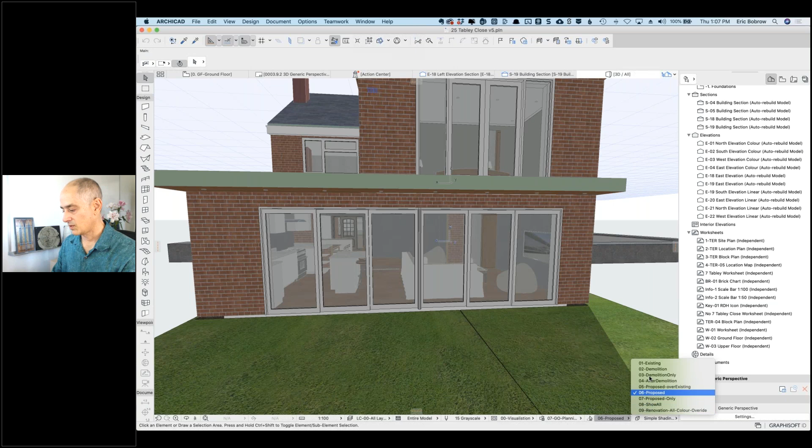Okay, so this is a proposed view. It uses the Renovation Tool quite a lot. So if you were to click on the Renovation Tool, you will see the existing plan. Wow, okay, let's get an aerial view. So this is existing, and this is proposed - yes, you're actually removing a bunch of stuff here. Oh yeah, okay, all right.

So, Ian from Scotland, anybody in the UK will be very familiar with this kind of bit of reconstruction, if you like. Originally the house didn't have all that junk on the back of it. Because the existing building, when it was originally built, maybe in the early 70s, that rather ugly garage would not have been there, and that extension on the back is actually 200 mil lower than the floor of the original house.

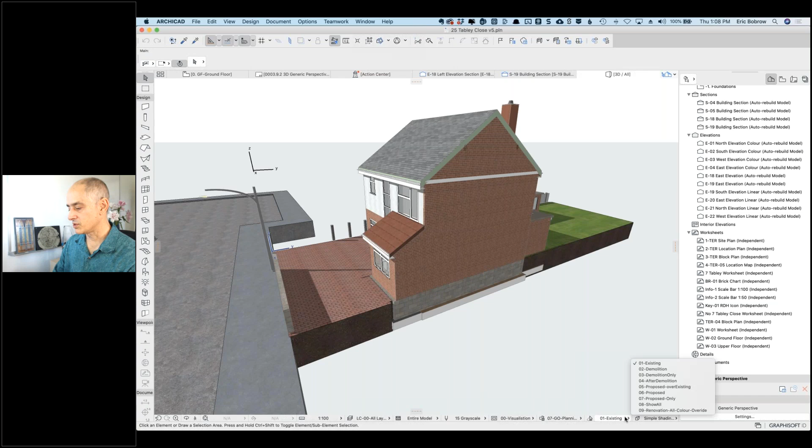So you drop down into there, it's damp, it's horrible - that's all coming down, and my stepdaughter wants to do what we call a wraparound extension. So if you were to whiz round, it effectively goes out to the side of it and then out to the back. So let's put it to the proposed here - okay, yeah, so actually, yeah, it's that side, yeah, it's the west side. That's it, all right, so this is proposed, and let's go to existing.

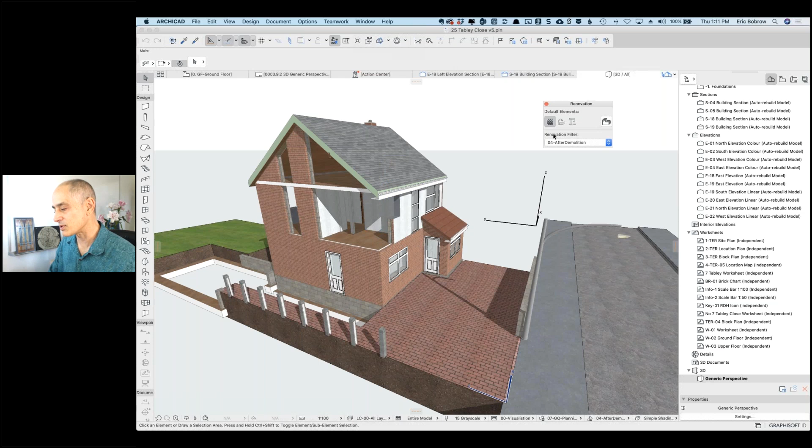And then after demolition, at least in theory, in abstract terms, this is what you'd have after it's removed. You'd probably never see the building look like this, but because of the phasing - proposed over existing highlights the new stuff and highlights what's being removed. And now proposed is here.

Now let's take a look at one thing here - what's going on with this roof? So this roof, the existing here, is extending past the new. It's natural that if we go to the existing conditions, this actually overhangs that area.

What we'd want to do ideally, for the cleanest result, is to designate that little strip - it depends on how we do it. If I go to proposed here and take this edge, we might pull this back to there. Now we're not seeing that line because we're basically only showing the new stuff.

So that's probably the simplest thing to do, even though there's going to be much more structural work done in there, and it looks like we're not seeing that as much there, but visually we can still tell this. So this is optional, but it would give a cleaner result.

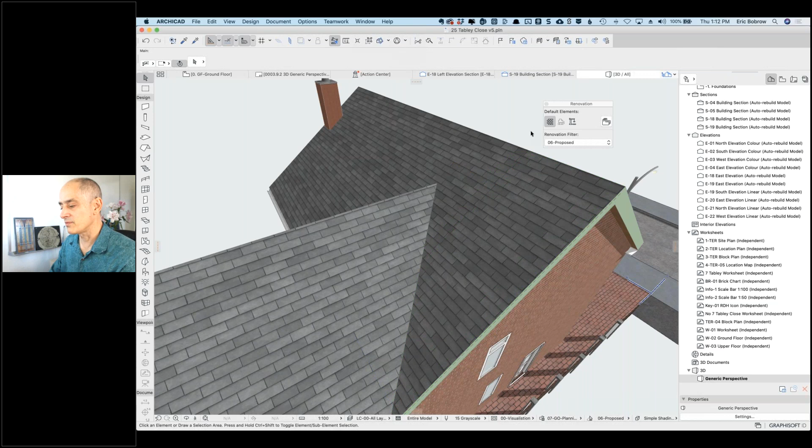Now I also see just a little modeling error here, or something that hasn't been dealt with. So this is a wall that is new, and this roof is new. Sometimes we have issues where things exist and they're being trimmed in different ways at different times.

Here it's going to be pretty simple - just take this wall, or the roof and the wall, and probably the simplest thing I would do first would be to connect them, trim elements to roof shell, using the roof that's currently selected, and you can see that disappears. Obviously a very tiny little thing.

What's going on here? Is this an actual bump out? No. So this is interesting just in terms of modeling - why are we seeing this up in here, but not down there? We can see it. Or is it a gap? Actually, it's a gap in here.

I know what it is - it has to do with an interior wall cleaning up to the other elements. So we could go in there and fix that.

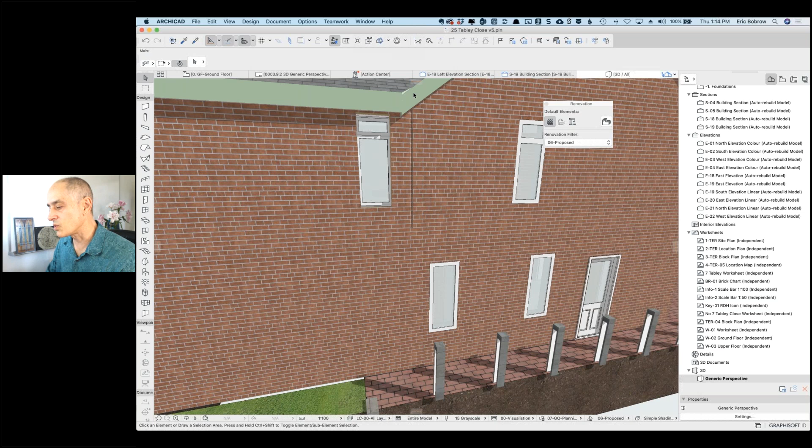We'd also want to potentially look at what's going on with the roof alignment there. So this is a new roof, meeting up with the existing roof and with this other piece of new roof - an extension. So probably what this is, we just need to extend this piece over a little bit and shorten that one so that they meet properly.

Now, you asked for general feedback - overall I'd say the model looks pretty clean. We haven't looked at any of the construction documents. What in particular would you like some feedback on?

I think first of all, there are a lot of errors, right? I'm using this tool to cut my teeth using Archicad. This is probably my fourth model I've done, and I'm trying to use it as best I can.

I think really the big mistakes I make are, particularly talking to my stepdaughter, who is my client, shall we say, she changed her mind many times over. So if I was a fully fledged architect, I'd be charging a fortune. But I think what I keep doing is I'll create a new version, copy and paste.

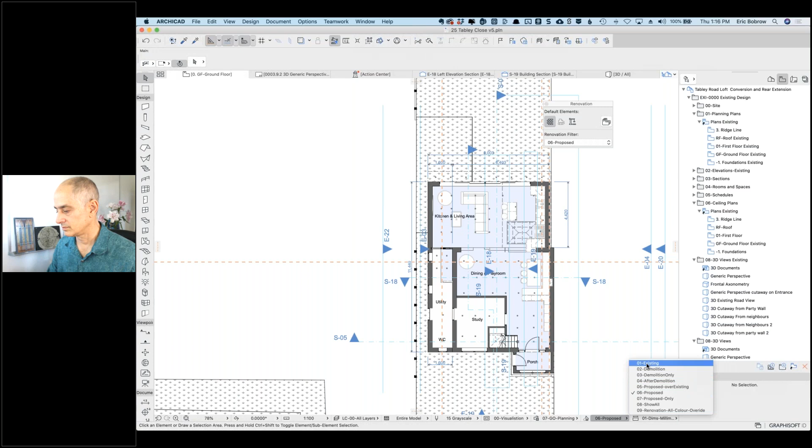And I think I just keep introducing errors, certainly into the walls, particularly when aligning walls up, junctions at walls. That in particular troubles me. So on the view you're looking at now, as a good example, that's the proposed view. If you look at the existing view and flick back, get an idea - the wall that's building, just to the right of your cursor, that junction there. I'm going to demolish that conservatory and butt a new wall up against that.

Now you're seeing it in what we would call the planning view, but in the actual detail, let's look at your construction document. So we have plans for first floor, we are on the ground floor - ground floor proposed. Where do you have a different style of view that's...

So if you change the pen, I use a graphic override. Do you have a view saved for the plan that you're just describing right now? I haven't created a layout view for it, no. Okay, so that would be a suggestion. But this is our graphic override - you want to turn off graphic override? If you go to design... 02 GO Design, okay, yeah, and that should, there you go.

All right, so now we're seeing, of course, a different depiction of the wall. So this is insulated here, and this is just hollow. Yes, cavity gap wall.

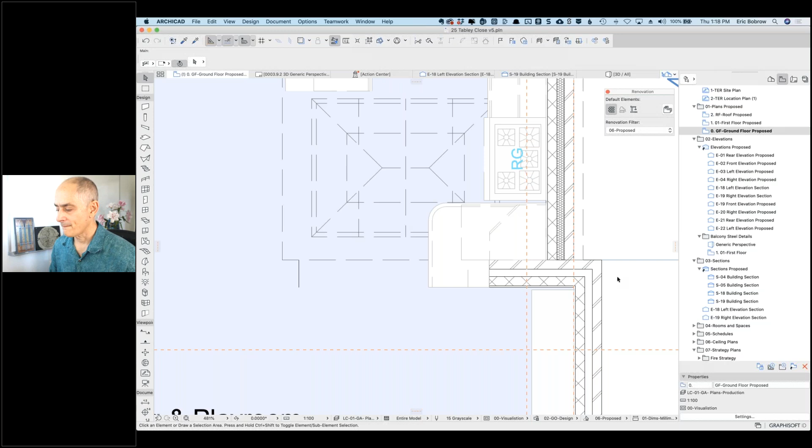Okay, now that we're looking at it in more detail, what specific questions or problems do you have with the way this is depicted or modeled? I think really it's the way it's depicted, not necessarily the way it's modeled, because a builder will take this drawing and say, oh okay, we're putting a cavity wall insulation on the back there, and they would quite cleanly not have this cold bridging arrangement just to the left of your cursor.

I mean, that's not normal. You would have a gap between the insulation there. That junction is not correct - you would take that through and create a cavity gap. Because I'm not familiar with the terms you're using, cavity gap etcetera - this is a cavity? That's a cavity. You're talking about the insulation coming down?

Yes, so they would remove that. And this looks like an exterior wall condition - what's going to go on inside here? Because this is now interior space, right? Correct, yeah. So in the proposed design, that would be plastered on the interior. So on the interior side, that wall will be split - that's easy in the zone, using the zone tool to do that.

But in terms of the detail on this drawing, if I was to present this to a builder, he'd laugh at it, because he would need to see where that insulation is coming up against the outer wall, as you see here. In reality, you would cut through, potentially cut through, or create some kind of bridge.

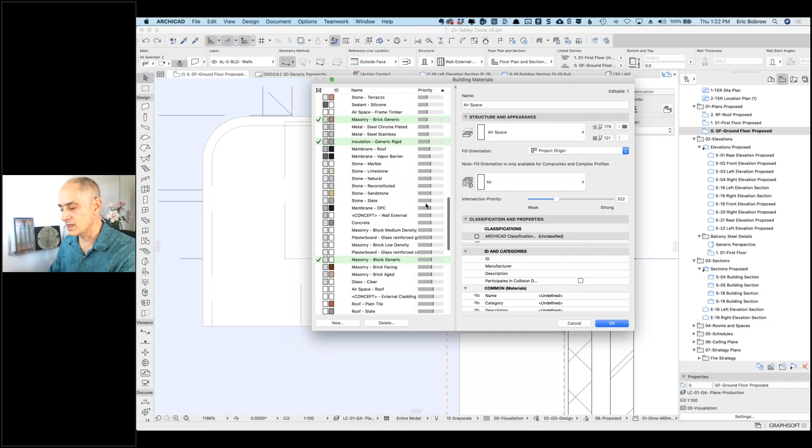You're just going to plaster over it. I just want to make it a different building material that will be permeable or have lower priority than the insulation. So I've just created a new one there, but I now need to go to the building materials, and let me just select these walls here and go to options, element, attributes, building materials, and say, all right, let's look at them sorted by priority.

And we can see that the masonry here, I think is this the block generic? Yeah, so that's the block generic, it's stronger than insulation, which makes perfect sense. But what I'm going to do is create a duplicate of this, and we'll just give it a designation, just so that it stands out differently. And then I'll take this duplicate and move it down below the insulation, so it'll have a lower priority.

Now, just by creating it, it doesn't do anything at all to the drawing, but now I can select this wall and say edit this. First of all, I'm going to change the wall to the new copy that I had done. It doesn't look any different, but in the new copy, I'm going to say masonry brick generic. Oh no, it was block generic interior. So it was brick generic.

Let's see, we have the plaster on the inside, right? Okay, so let me actually check. I guess I duplicated the wrong building material, not really recognizing this here. So we'll put a building material - the block generic, we want the brick generic.

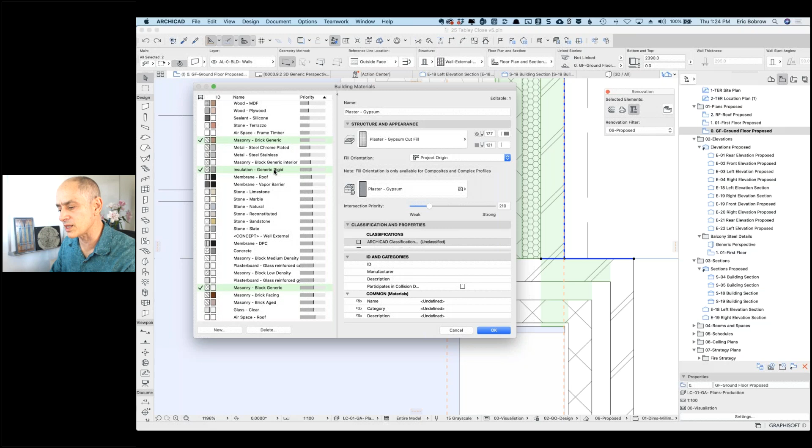So where is brick generic? Looks like it's actually lower priority than the insulation. That's interesting. So what I wanted to do was create a building material that was lower priority than the insulation, and yet we already have one. So why is this not changing the way it's cleaning up?

I'm going to just take these, probably because these two are not cleaning up to each other. So let's actually, let me just take this here and take this back here. No, okay, so these two, let me just drag a copy of them off to the side to see. So I'm going to drag a copy off to the side like this.

So the question is, why is this, if this is a higher priority than this one, why isn't it cleaning up? Let me think about this. This should - so these are turning the corner, but this is higher priority.

So let me see if we were to change the reference line here. So we go to edit, reference line and plane, modify wall reference line, and say I'd like to put it on, let's say, the core outside. Okay, so now it's placing it there. Now, if I take this down to there, okay, so now we're seeing at least a possibility here.

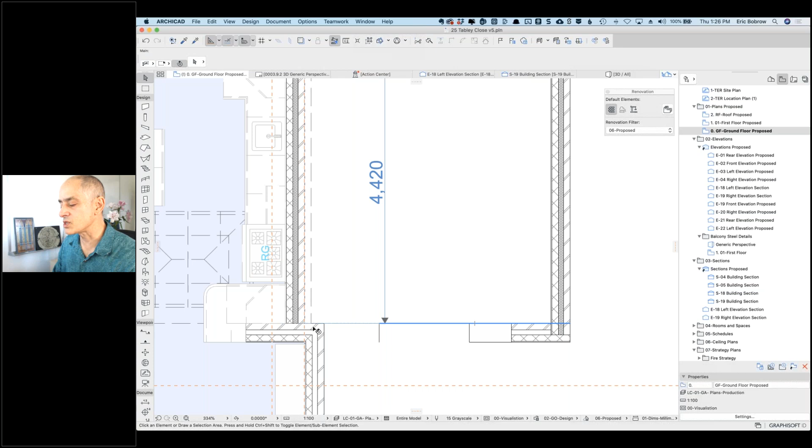Now, this is apparently stronger than this, or these. Oh, it's interesting, this is reversed. I guess - yeah, because that's an extension wall. So that was an outside wall. Right, and this is an inside wall, of course. And this is the interior, yeah.

So we may have to do a combination of things, but what we ultimately want to do is play with it. And again, this may take longer than we have time to do. We would want to break up these walls into potentially 2 or 3 pieces - we've got 2 pieces, but we might need a 3rd piece in order to get the effect that we need, and end up with the insulation coming down and things cleaning up to each other the right way.

So you're going to be doing some reconstruction in this area to get the insulation down there and to cut off parts of the masonry. So that would be a starting point, would be to break it into multiple pieces and help Archicad make the cleanup of the corner.

You'll want to also consider, in some cases, just having the building materials with the right priorities so that they pass through. In this case, the interior one seems to have a higher priority than the exterior, so that might be something we need to consider. So if we go here to building materials, select these two. When you select them, you can see the ones that are in use, which makes it much easier to adjust.

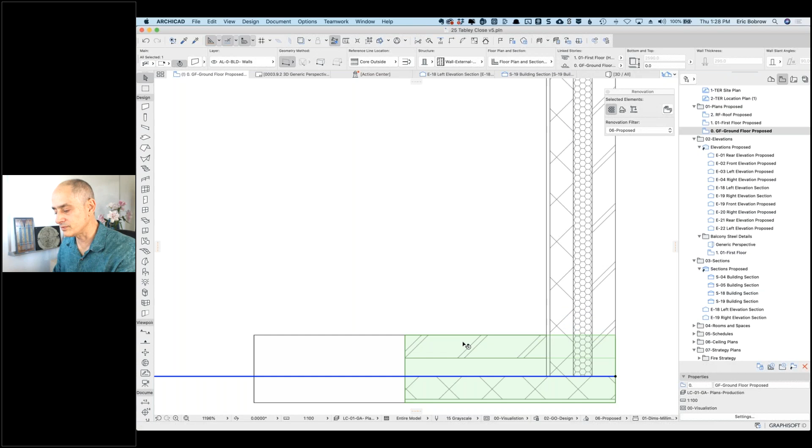Let's just do a quick test here of saying that the brick generic and block generic, what if we were to take the, so the brick is the outer one. Let me just take this down. Brick is the... just what happens if I do that.

Now we've got a different type of cleanup going on with the plaster in here. We would be putting the plaster on this. So this one we're going to be plastering over, right? Yeah.

So we've designated this as a—what do you call it—so the masonry here, which was the outside face, I'm going to insert a skin of the plaster gypsum. We'll say insert a skin. We'll say that this is going to be the plaster gypsum, and of course the thickness is going to be 15 mil. So 15 there. And this should be a finish there.

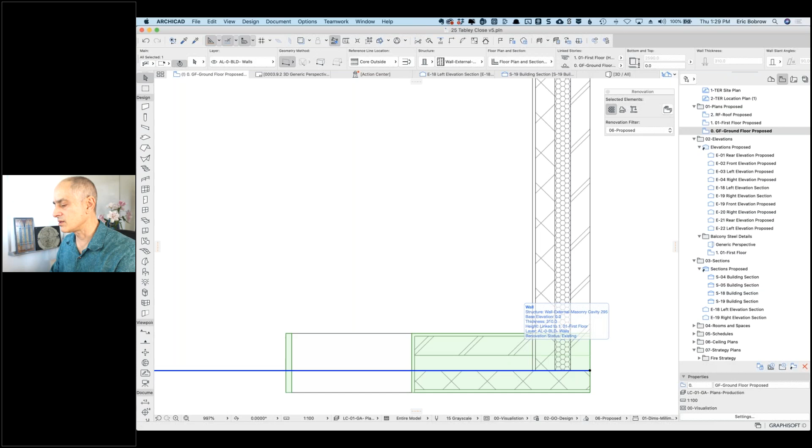All right, so now you can see I'm starting to at least get the plaster on this area. Question is, why is this? Is this the actual same composite? I just wonder, it's nothing to do with the renovation tool, is it?

Because this is proposed or new, and this is existing. So let us see if we were to, in this copy here, just make them both existing, just see what that does. Yeah, oh, look at that.

Okay, so there is a setting here that in the renovation filter options has to do with whether existing elements are going to intersect with new elements in this particular filter. So if we say we do want to allow them to intersect, because they're going to be sort of reconstructed to intersect, then I can undo back, and this is now new, but it's still doing a cleanup. And in fact, now we've got this turning the corner here.

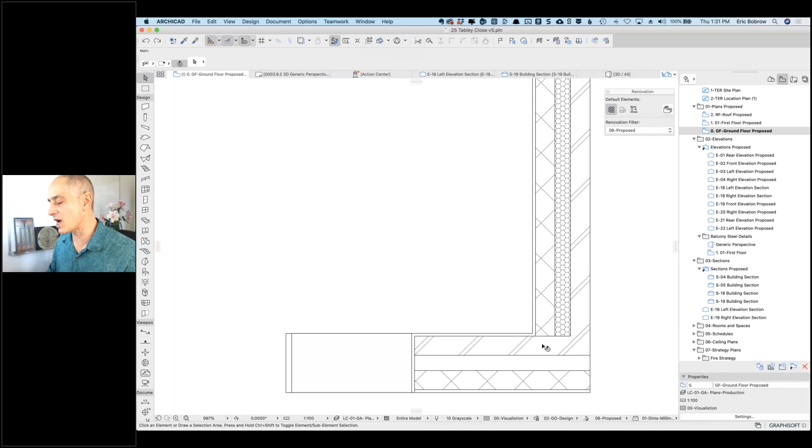Of course, this wouldn't go through like this, but we'd have to keep playing with the priorities to get—we don't want the insulation to be the highest priority, that doesn't make any sense. No, that was a good find. It's the renovation tool, yeah.

So I just moved these both down there. So I think, what was it, was it the brick one that was—well, let me just move them above the insulation here and see what that does. Okay, so now you can see that as we play around with it, we end up with some different results.

So just by doing some experimentation, making sure that this is higher than this one, and this one might be—we might use the copy one to make it a lower priority. So let's see this one. I realize I want to go on to other ones, but here's brick generic.

I think, Eric, what you've just demonstrated there is I will now work with that and then just establish what's going on there. But I figured it was a renovation tool thing, and make sure I've got my priorities correct. But the renovation tool with the 'do not intersect' unchecked—which is actually, yeah, that's a negative way of thinking to me.

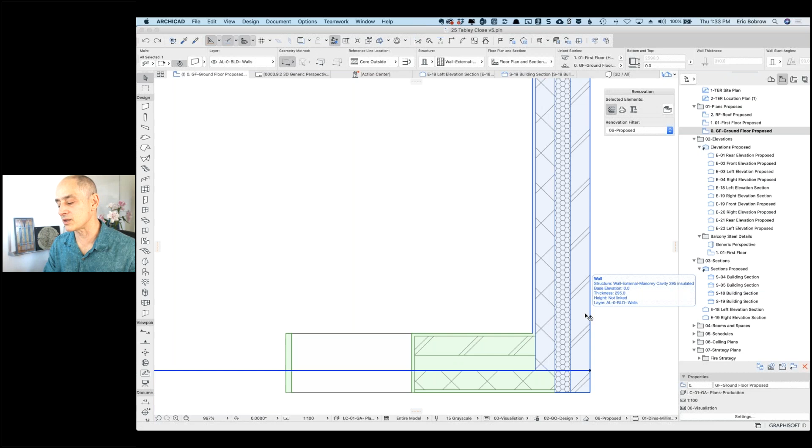So okay, we know some of the tools that you'd need, related to possibly creating additional building materials, changing reference lines. So that things do clean up, and it may be that we want to move the reference line up here, actually, rather than down there.

But changing the renovation filter options potentially to have things clean up to each other, because we don't want to say that this is existing when it actually is new. We want to go and get the overall stuff that we were demonstrating earlier to work.

So this is a complicated thing, and one of the limitations of Archicad's renovation system is that when changes are made to a part of an element, like if you removed cladding and replaced it with a different type, unfortunately you have to basically tell Archicad to demo the whole wall and put in a new version of the wall, even though you might not be doing that. Same thing with the roof.

If you've got an existing and a new, we were able to pull back the new part to just be where it's extended. But in some cases, you're going to have parts of the existing to be removed, and you actually have to split the roof into two pieces, the part that remains and the part that is going to be removed. You can't just say existing is the whole thing and then this part comes out. You actually have to make it puzzle pieces that fit into each other.

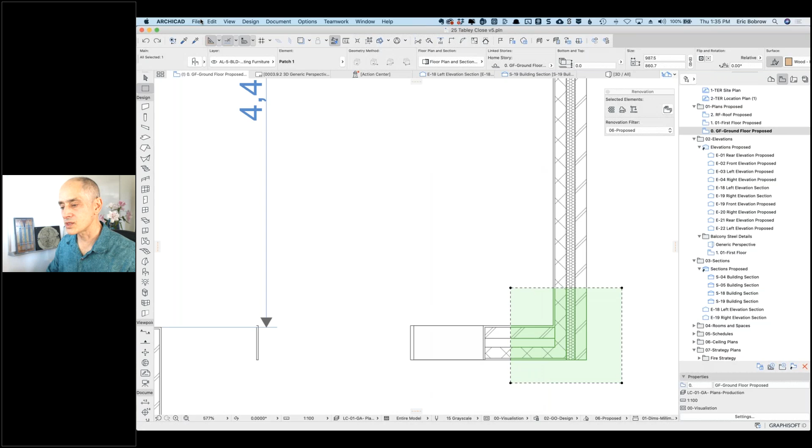And the other possibility I'll mention is, while I do think this is achievable if I took another 10 minutes, there is a tool called the patch tool, which I don't recommend using frequently. The basic idea is I draw a marquee around an area, go to the document, Annotation, create patch. What that does is put into your project library a graphic, and I'll just leave it as the word patch one.

And this graphic here, if I put it back in place, I'd like to open it. With it selected, I go to Libraries and Objects, open the object, which happens to be that patch object. And now I'm in a 2D environment where I can literally go and delete things.

We'll just do one quick thing here. Get rid of that line. These lines there, stretch that to there. So this is sort of, and maybe we get rid of the line. Okay, so now we have something that sort of looks like it's wrapping cleanly.

And then of course we have this fill go away. So we'd be doing some of this stuff. I'll just leave this slightly unfinished. I'll save it. And now when I go back to the ground floor plan...

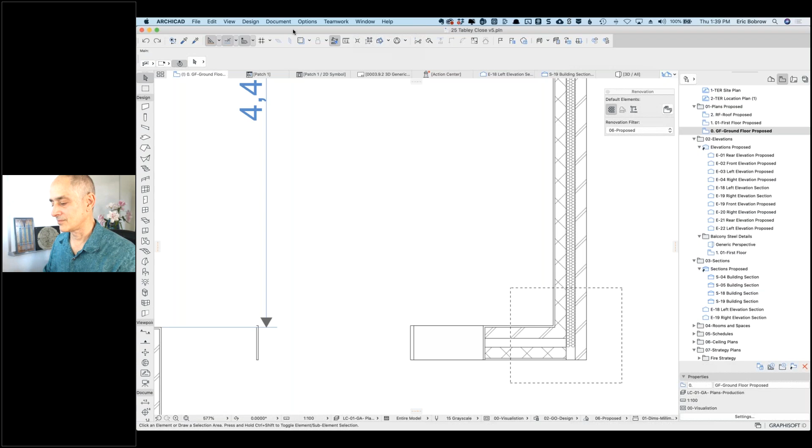My inclination always is to say, all right, well, if we just had a slight variation of the building material for a piece of wall, can we get it to automatically do the right cleanup? Yes, but it would probably take a little bit more time. So thanks for giving me a good thing to go over.

Is there anything else before we move on? No, it's been very useful, I think, Eric. It is a powerful tool, and there's lots that I'm learning all the time. The stair tool is a nice tricky little one, I must say. Yeah, it's continuous work in progress for me. For sure. Now I'm going to just save this as a variation and I'll send that back to you.

Obviously, this area here you can just study. What I did change: added 2 new building materials that were copies of existing ones. I created a new composite that was only partially successful. And I did move around some of the building material priorities, which would need to be studied more carefully, because as I move things around, certain other things may not clean up properly. But you'll have this file to at least look at and see what's going on.

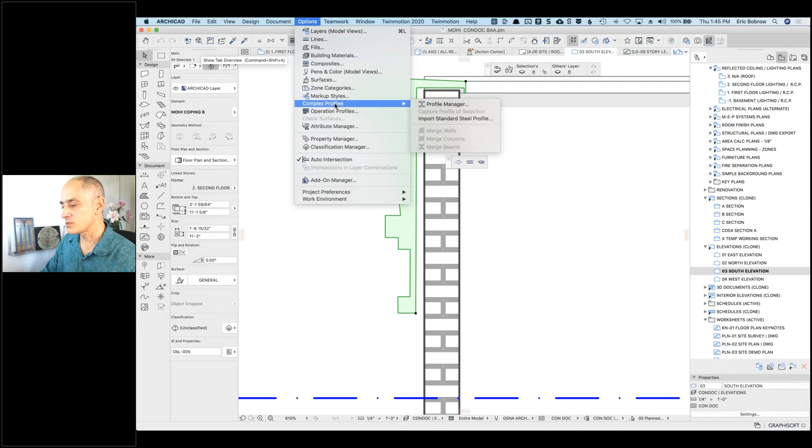So fortunately, I can quickly create one of these, and I'll show you how that's done. I'm going to look to see if you have an elevation that would have this information, like this particular edge exposed. Guessing that it's south elevation, but I don't know which orientation it is. Okay, so we do see a piece in here. So this is your coping object?

Correct. Okay, now we're seeing it in elevation. I don't know if this is straight on, I'm assuming it is. What I want to do is copy this as a graphic and paste it into a complex profile window. Now, given that it's an object, I'm not quite sure whether I'll be able to do that directly. So let me just say copy, and we'll go to options, complex profiles, profile manager.

And I'll say that I'd like to create a new profile, and we'll list it coping 1. This allows me to draw a shape that's going to be used as an extruded form in your model. Now let's see if I can paste this in. Okay, yeah, it looks like it came through cleanly here.

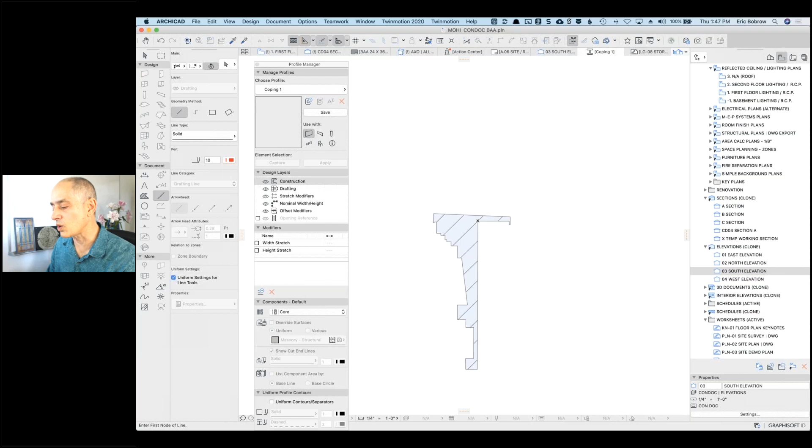Now, what you'll notice is that there's this little X. The X is the origin point of this particular profile. Now, what we want to do is position this shape, which is no longer an object, it's literally just a fill. We want to position it where it'll be easiest to draw. I'm going to guess that if I drag it down so that this point here is what we want.

These are now lines, so I'll just select all the lines by activating the line tool and doing Command A or Control A, and then I can drag this down. Now, the complex profile will actually ignore the line work, it'll only be paying attention to the fill. But actually, let's just undo this. I'm going to get rid of all those lines, and then I'll just select the fill.

And say I'd like to have a contour around it, and maybe just make it a thinner contour. All right, so now this is a shape that I can say I'd like to be able to use with beams. Now it's possible we might use the wall tool sometimes, but primarily I'll use it as a beam option. Now what is this actually, what is it made of?

Well, it says here that it's a fill that's going to be represented or made in the model as masonry structural. Now, maybe that's appropriate, but I'm going to guess that concrete precast might be a better option. It'll be rigid foam. Okay, so then, do we have a rigid foam in this?

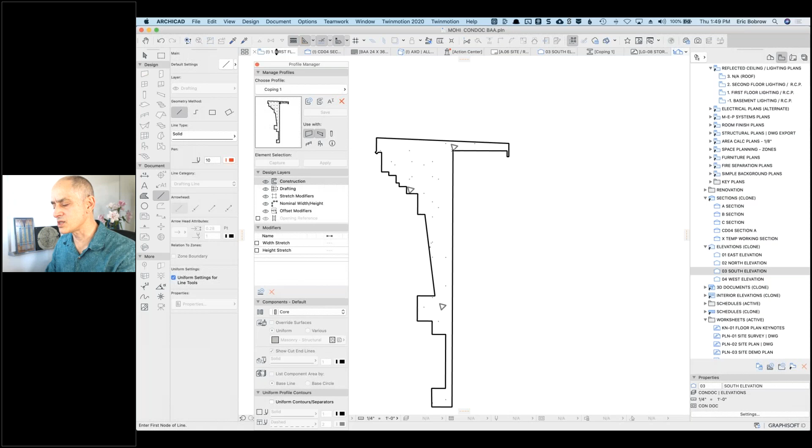Well, let's just do it here, so we're not getting sidetracked. It's basically going to be something that is applied and follows around to create the ornamental shape. Did I get this right? Yeah, the origin point is in the middle of that. So I've now saved this. You can see that it now shows the preview.

Now, how would we draw with it? Go back to the plan. And I'll just demonstrate that when we use the beam tool with this. Now I just clicked on the plan and it's giving me a spinning ball, so I don't know why it was taking a while. Let's turn off our trace and reference. I know this is just an excerpt that you copied over, but I'm not quite sure where I'm looking at.

Would it be in this area here, but up higher? Around on the other side, the top side. This side here? Yeah, over here. Yeah, along that front wall right there. Yeah. Okay. Mhm. All right.

So what I'm going to do is I'm going to go to the beam tool. Now, right now, I'm not going to worry about what elevation, I'll move it into the right elevation later. I'm just going to say I'd like to draw a sequence, and let's choose the beam architectural. We'll say unlock this layer here.

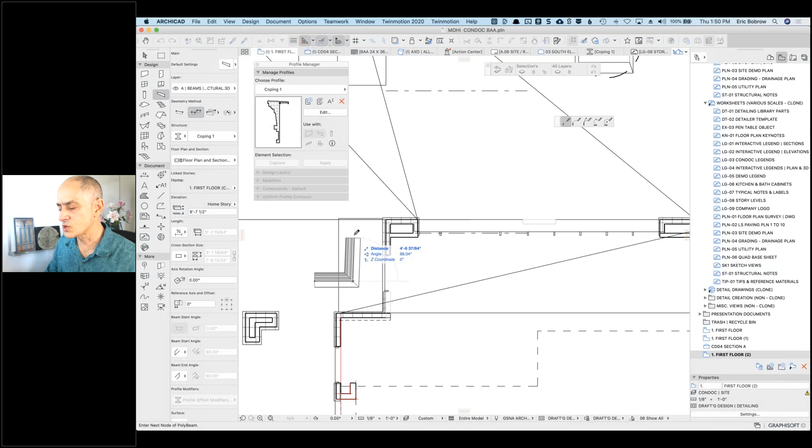Oh, actually, I have to choose. We're doing a complex profile, and the complex profile I'm going to do is the coping one.

Now as I draw this, we are seeing this rather complicated shape. I'm guessing the part below is the little top part that's just got a simple cap, and the part above on my screen is the ornamental shape. I'll just draw that up. I'm deliberately not trying to fit your building - I just want to show how it'll clean up to each other.

You can see the representation on plan. When you're drawing beams, you can choose whether you show the reference line or just the contours - that's optional. But let's take a look in 3D at what I've just drawn. I didn't pay attention to the elevation, so it's probably lower down, but here it is, and you can see how cleanly it's doing the corners.

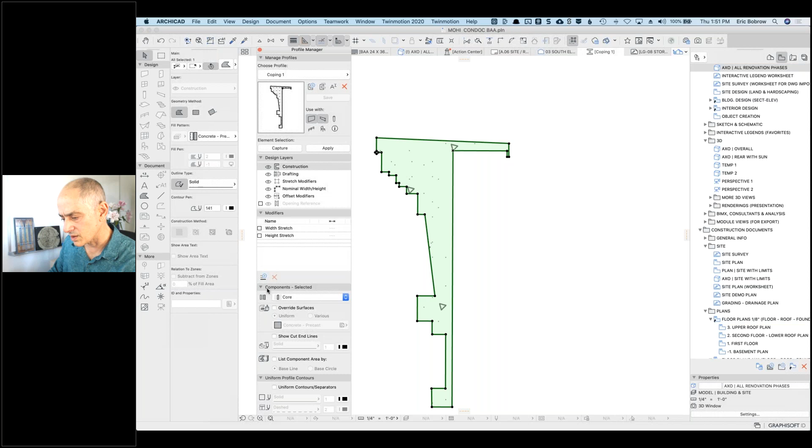Now, the surface appearance of this is based on what building material it was. I can override that, or I can edit this. Let me just edit it - as a starting point, we don't want it to look like dull concrete, we want it to be painted.

So let's go here to components - ceiling white. Let's see, override surfaces, and you have it as ceiling white. Yeah, so it'd be color, white ceiling. There we go. So that's uniform on this, and I'll save it.

So now if I go back to 3D here, now they're a bright white. Beautiful. Okay, so you just basically drag this up into position, or just draw it with the right point. So if I say this one as a starting point...

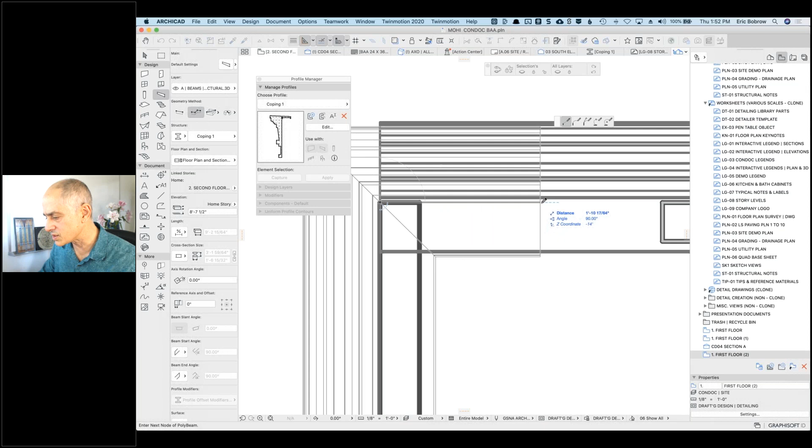If I get rid of it and we just draw on the plan - let's see, so we're on the first floor, let's go up to the next floor up perhaps. Yeah, here, I just deleted that. So we're going to go to the beam tool, and you see how it just snaps here, and I'll just turn the corner.

Let's see, what point should it be? Should it be this, or should it be... get me. Okay, so I'm not seeing anything that's snapping here. I'll just use the shift key to do that, and let's see what that looks like if I've gotten it right.

So it's on the wall. I just need to change the elevations, get the elevations there. So if I even wanted to just get the basic thing done quickly, I can drag this corner point up until it snaps to your wall, and now it is exactly, I think, in the right place.

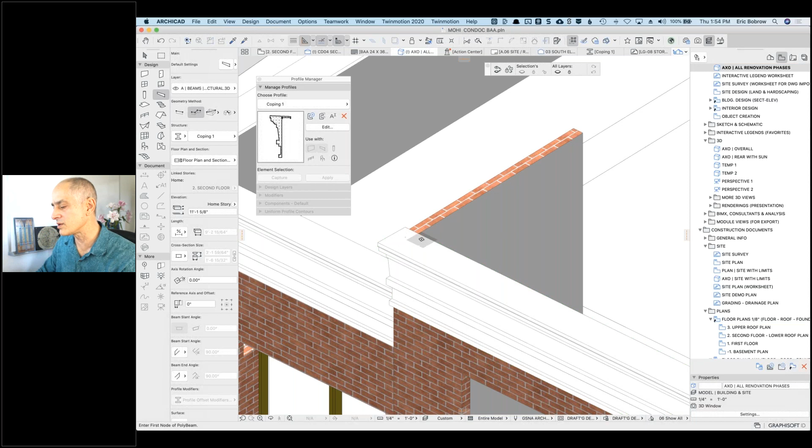And perfect, yeah, so once you've got this, you can literally go - we'll just delete these from it. Take this and stretch the end of the blue line right there, with the option to extend this, and snap that. Whoops, I don't think I quite got that there. There, that's the point there.

Although it actually looked like your walls were slightly offset, but anyway, you get the idea. It's going to clean up at the corners nicely with a complex profile used with the beam tool. So it should be pretty quick once you do that. Does that make sense? Perfect, Eric.

Thank you. You're welcome. So I'm going to go and we'll just save the project, and I'll send it back to you - save as. So I'll send it back to you after the call. Thanks so much. You're welcome.

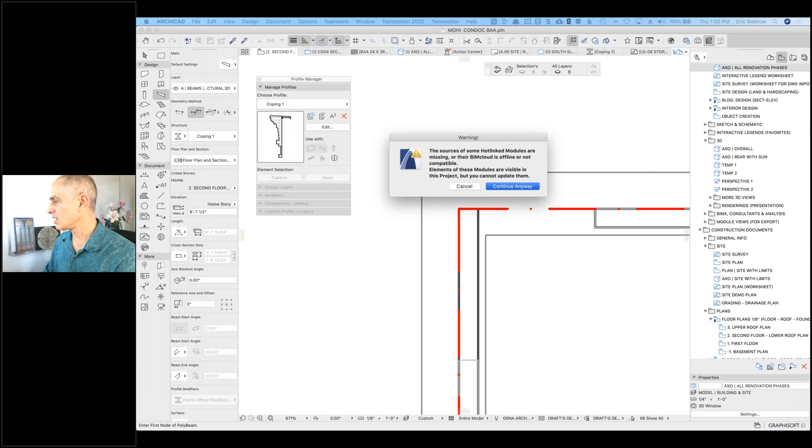So let us see. Okay, I see Josh Baran said he had to leave. I don't remember if Josh sent me in a file - I hope he wasn't one of the ones who was waiting to have a file looked at.

So Monica, I think we can do up next. Let me just check who I've got on tap here. And this is still saving. Oh, project review. Oh, meeting room is being taken over, and he was the one who had a template.

Okay, rejoin again from the shared group workspace if possible. That's too bad, because he had sent in a template. Didn't realize, and it's very early - he's down in New Zealand, so I thought he would be on till later. Okay, we'll see if he comes back - he said he might be able to come back.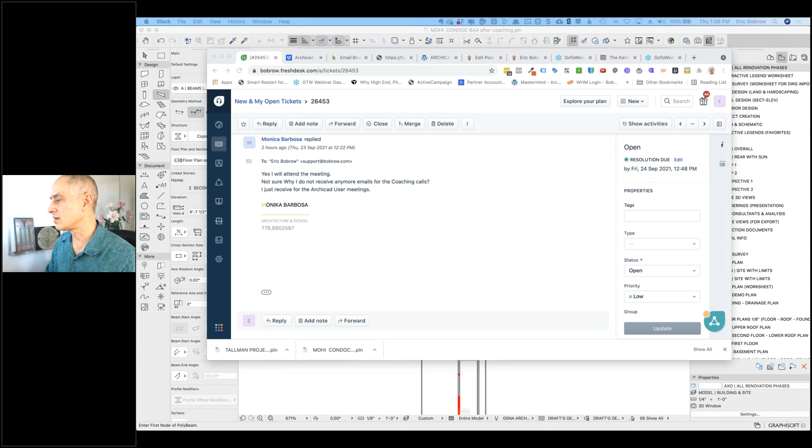All right, so Monica, let's get your file here. Okay, so I do see a question from Mike saying: when I do a 3D cutaway in a design view, is there a way to have the cut-through area show up in a tone or color? That is an easy question, Mike.

And so let's do another easy one - this is going to be literally 3 minutes, and then we'll do Monica. Let me open up Monica's line... and then we have Mike, your line there. Okay, so Mike, your line is open. So in terms of a cutaway in a design view, let me just switch to my sample project - the one I use often for demonstration - and I'll do a marquee cutaway.

This, and perhaps set it up to be multiple stories. Say show just what's in the marquee. Now, when we're looking at what's in the marquee here, we're seeing the edge with the components.

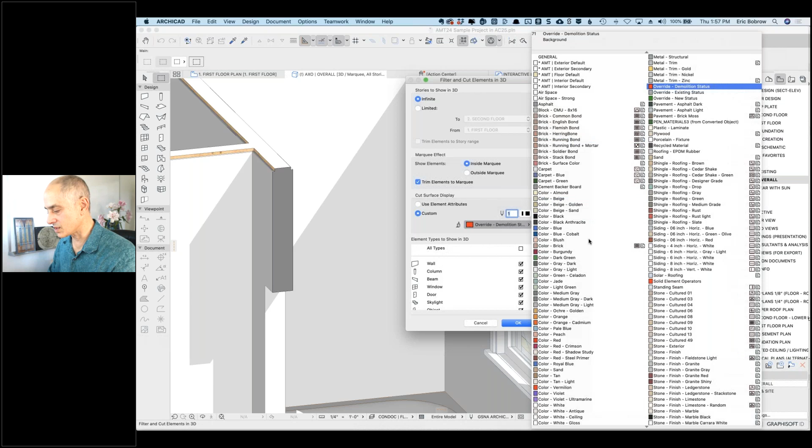There are two things that can affect this, or that you can control it. One is under the View menu, elements in 3D view, filter and cut elements in 3D. So we are cutting with the marquee tool these elements, and we can say instead of using the element attributes like we see here, I'd like to give it a custom edge.

Black would be one choice, like that, and it doesn't look really solid black, but it is black, just because I have a lot of light on in this. Of course, I can go into this and change it to something else, you know, like for example one I like is a red. It stands out there, but you can do that.

So that is the main place you do it. This can be saved in a view. So if I were to create a view here and say cutaway, bathroom with red faces there. So there it is.

Now I'll show you a different cutaway here. So we have cutaway. This is obviously a larger slice of the building. Here's the red. So basically all I did was change the cutaway settings that I just took the dialog and then save that as a view.

And when you go right now, it'll have the red, but if I go back to this natural one, then this filter and cut elements will be use element attributes. So it's saved in the view.

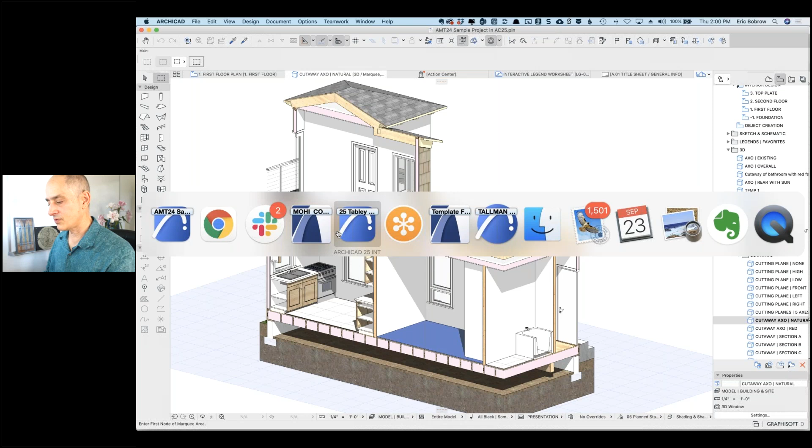Oh, and Josh, you made it back to the webinar. Good. Okay, so then we'll...

We'll have Monica's question, then I'll go to you, Josh. So not sure what you mean, Eric Gedney, about making the roof cut through just a single line, not the thickness of the roof structure. So if you can clarify that a little bit more.

Okay, so let's go to Monica. Now, Monica, your line is open. Do you have a microphone? Yes, I'm here. Okay, so let's see, your file, Tallman, I think? Yes.

Okay, all right, so we have a file here, and let me bring up your question. So your initial question was, can you help me fix the elevation to match the survey? I tried to adjust sea level to be at the lowest elevation number in the survey, but now the house is way below and inside the terrain. How can I change it? Okay, so let's look at the model.

Let's look at the survey data and get them reconciled. So right now we are looking at site plan new. You have a view of the 3D model. Well, you actually probably have a 3D proposed. Yes.

So we're seeing this rather tall chunk of terrain, and we're not seeing the building at all. If I go to the wall tool and say select all walls, we can see they're way down in here.

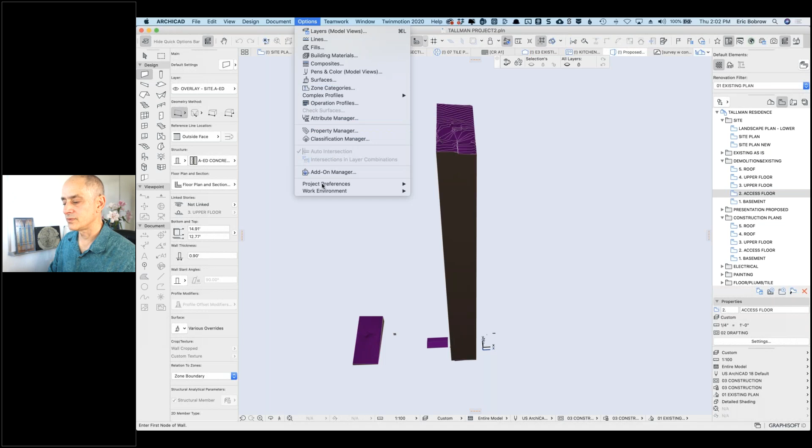Okay, so let's look at your story settings first of all. I'll just go to any one of these stories and say story settings. And it says that your floors, your basement, you've set as the zero, your project zero. Okay, so that's fine. That means that all your elevations for the upper stories and the different roofs are just positive numbers on top of that.

And it's coming through as decimal feet. Are you working in metric?

It doesn't really matter—the survey is in metric, I guess. Actually, I'm not sure now.

So if I switch my working units here—somebody asked a question about working units and what I'd suggest. Working units really is optional, or let's say it's up to you based on what you're comfortable with and what the standards are in your local area.

So you're in Canada, right, Monica? Yes, in Canada. In Canada it's a hybrid—I lived there for 18 years, so I'm somewhat familiar that a lot of people grew up with feet and inches, but officially changed to metric. The building industry is also influenced by buying US materials, so things like studs and boards are often US standards in terms of inches, not the same as something made in the UK or Europe where it may be all metric.

But anyway, we'll just put it into millimeters here as a length unit. We're probably not dealing with area right now, just with how far apart things are. And I don't think we generally need to go down below a millimeter accuracy.

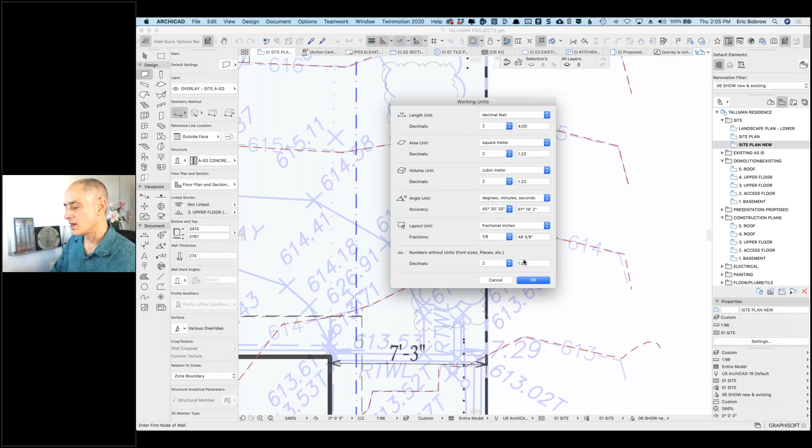So we'll go to working units. We're going to say that we're working in feet and fractional inches in general, and we'll say it down to the eighth. This is how it'll read off to you here. You can always input down to anything—you can say 100th of an inch, even though there isn't really such a thing as 100th of an inch, but this is what it'll read off to you.

Actually, you'll be better off—you see, 615.11, that's decimal feet. So we can say feet, or decimal feet. And 2 decimals—we need at least a couple of decimal places there.

All right, so we have the 614, 613—this is 600-something feet above sea level. That's why you had that rather crazy platform for building, right?

I see this so often, people getting confused with it. The first thing you have to think about is under the Options menu, Project Preferences, Project Location. When setting up a project location—by the way, this dialog has changed a little over the years, we're in version 24 I think, though there's more information now in 25—here's the altitude above sea level that your 0 is. So you did correctly put that in, saying that my basement at 0 is 611 feet above sea level.

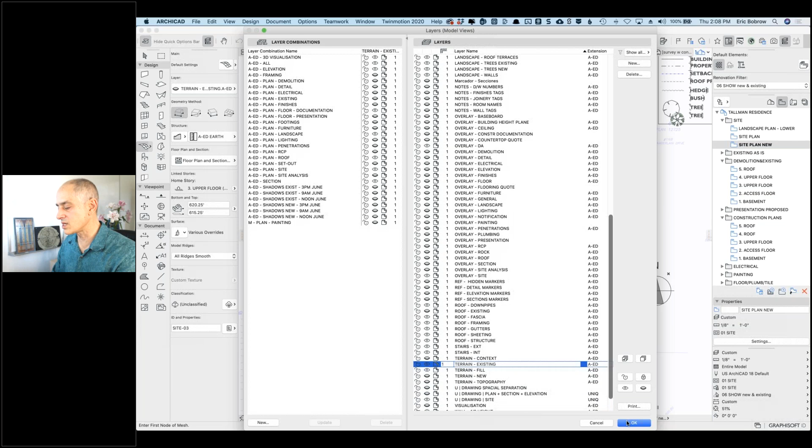So probably the place we need to look at is the site plan, the new one. Now, do you have a mesh? If I go to the mesh tool and say select all meshes, no meshes show up. The layer is turned off for this mesh. Can you turn the mesh showing on the site plan on?

Let me go to the layers and see what layer the mesh is on. Terrain, it's terrain existing here. All right, I'll turn that on temporarily. And now we can see something show up.

Select it, go to the mesh tool, and we should turn on quick select. That way, when I hover over something, it will be able to select the mesh. When I have the mesh tool active, it prefers the mesh to something else. Maybe if there was a concrete slab, it would still prefer the mesh.

Now this mesh right now, you have it set relative to sea level, its height, so you have the bottom of it 616 above sea level and the top there. Now this actually could be a good setting. Let's see what you've got for these point elevations. These points you've input are 617 feet above the reference plane. That's why this whole thing is off.

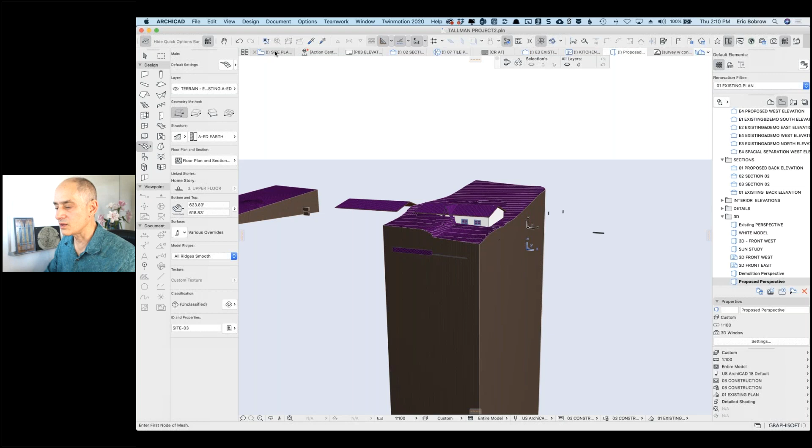So while you moved the mesh up to a good location, these individual points were already floating off. So what I'm going to do is not make any changes there. I'm going to make a guess that if we were to put this at 0, and I'll just put 11 here. Now I can always undo this. Let's just see what happens in 3D when I do this.

Okay, so now you can see the mesh has moved down and the building is now approximately, at least it's not totally buried. Okay, so let's look at the coordination that we have here.

If I zoom in on this 618 feet and select the mesh, we've got your terrain points here. I press down on this one and ask how high did you set it to be. It says 618 feet to the mesh reference plane. Now, the mesh reference plane, I said the bottom was 0 and the top was 11, but actually this should be something like, traditionally, -10 and 0.

So I want it to be basically the reference line, which is this little top one, at 0. And now these points will relate to that. So 618 feet, it should work. Now it's still going to be a super thick mesh, but we should see the building now working.

So now this looks a lot better. I mean, we have some cleanup to do, but definitely, if we use the measure tool and I hover over a point, you can see the Z coordinate. Well, actually, the coordinate numbers are related to the project 0.

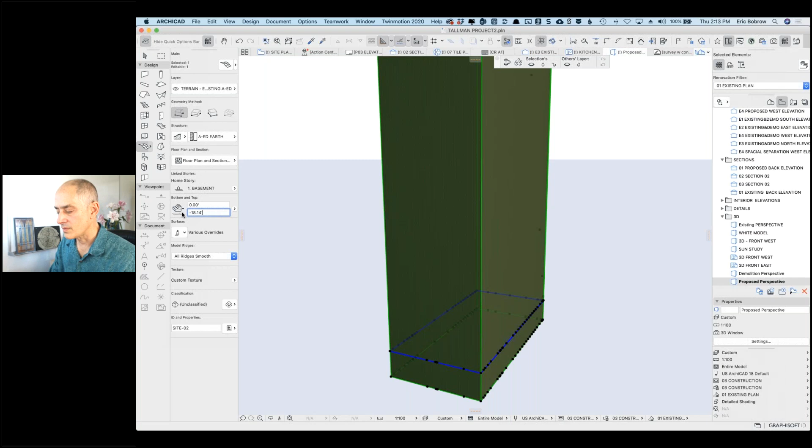Now you have a problem that you have this really huge platform, right, which is totally unnecessary there. Now we may be able to fix it, there are different ways. One is we can go down to the blue line, just below the blue line, this point here, and say we want to change the thickness of the mesh.

No, it's not letting me do that. But if I type in a number like 20 here... no, let's see, this is sea level. So I'm not quite sure why sometimes I can do this and why not.

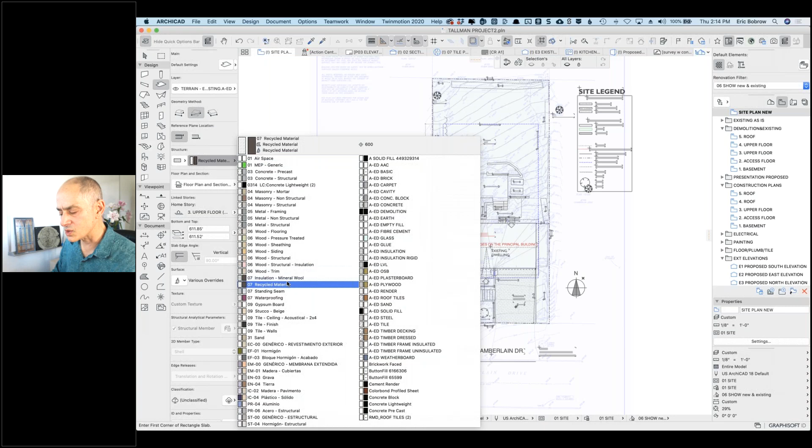So it is possible to do an inverted setting so that the bottom is considered higher and it actually cuts off the bottom. If we can't do that, there is another simple solution: use solid element operations to say we don't need anything below this general height. So how do we do that?

We just go and create something here. I'll just do a slab, and we'll put this on the same layer that the terrain was — terrain existing? Yes, okay. And I'm just going to draw a simple slab. Let's see, airspace — no, we want something strong that will have priority. Let's see, we'll do concrete structural here.

And I'm just going to draw a box around this. So I think the terrain extends out there. Now, when I go to 3D, we'll see that little piece I just drew at an arbitrary height. So let me just take this down, drag it down to some height here. So now we've got enough of a platform.

What I'll do is use the solid element operations: select this mesh as the target, select this slab as the operator, and do subtraction with downward extrusion. So it'll subtract wherever they pass through each other, and everything below that.

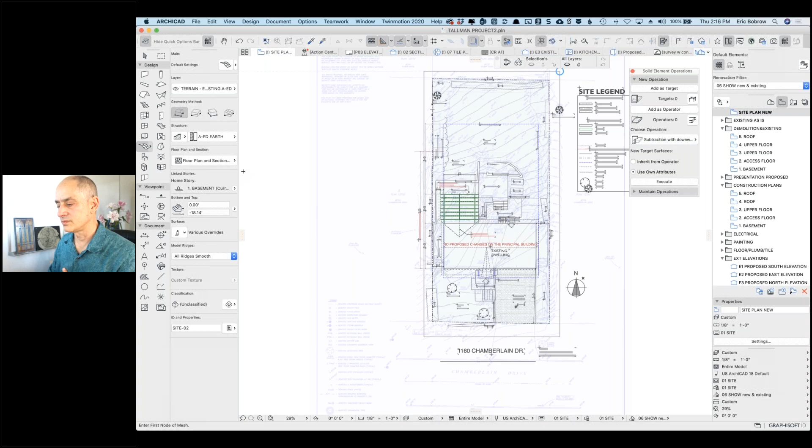And you can also put this on a layer that you hide, but you can't delete it, because if you delete it, the relationship will be forgotten. Yeah, all right, so that's the way to fix your existing thing — put the mesh reference line on the sea level, and then your contours all work.

Now, if we were starting over, what I would do is say — I'll just demonstrate this briefly — I'm going to take the mesh tool, and actually I'll just eyedrop the existing mesh. So it has this. Eric, let me just interrupt for a second.

If you try now in the site plan to just put an elevation marker, it still doesn't work, I guess. Okay, all right, so let's deal with that. Really a lower number. No, okay, so here we have the 630.

And I'm going to do a point elevation. So I'll do a point elevation, and I'll say — here's the 630. I'll just do it on this point here. It says 18 feet, 11, whatever — that's 18 feet above the basement level.

But what we want to do is select this text here and say we want this text to not be the measured value based on project zero, but custom text. This text currently shows project zero, which is the basement. I can change this to sea level — and here's the 630. Okay, that's the trick.

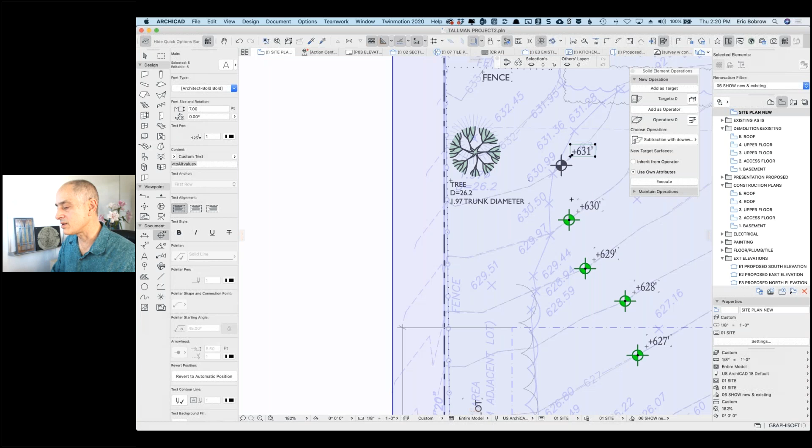Okay, so what I had to do was deselect one of these and select just the text. Even though I've got all of these selected, I couldn't edit directly. The last thing I have selected is just the text, and then I can change it from measured value to sea level, and you see they all change.

So basically you want to place them wherever you need them, select all of those level dimensions, deselect one of them and select just the text for it, then change that text to custom text, but one that says altitude value above sea level. That's what gives you the right thing.

Now, what I wanted to point out is this is an issue in terms of Archicad's interface - it doesn't give you an option when placing this to say what your reference is, but you can change it later. It's a little tedious, but it takes one minute to do once you know how.

The other thing though, you shouldn't have to cut off the bottom of the terrain, right? You should be able to just have it be only as thick as it needs to be. So here's what you do.

You go to the mesh tool, and instead of saying that the top of the mesh is 0 in relationship to sea level, I think this was like 611 feet. So I'm just going to say the top is 600 feet, and the bottom we'll call it 590, right? So this is going to be just a 10-foot thick platform, and I'm just going to draw this off to the side - just draw a rectangle.

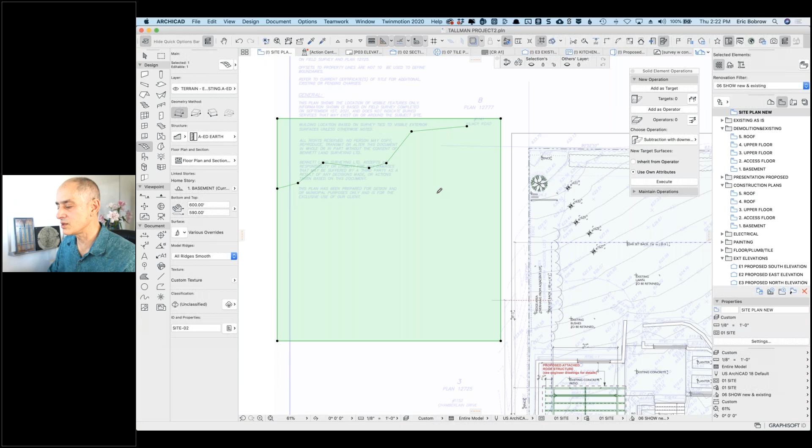And say that I'm going to make the elevation here to sea level - let's say it was 630. So 630, apply to all. I can type it in to sea level, but actually related to the mesh, it's only 30 feet above.

So basically the mesh now - this is going to be a little bit funny simply because this was 600 and this is 630, so it's going to be a little bit high. Let me just take this point up here and we'll say to sea level, let's say it was 640 there.

And we'll do one more thing - say this is the 20-foot level. So we'll do this, and this is going to be to sea level, let's say 620, apply to all. So now at this point, we're going to start to have something at least recognizable as a terrain model. You can see the 630, the 640, the 620 in there, but it's starting at 590, right?

That makes it easier rather than starting down at sea level, because of course the Earth goes down thousands of miles into the ground, so it's an arbitrary cutoff point - sea level versus whatever you need. I would always set the base level of the mesh at something reasonably close to the bottom of your site.

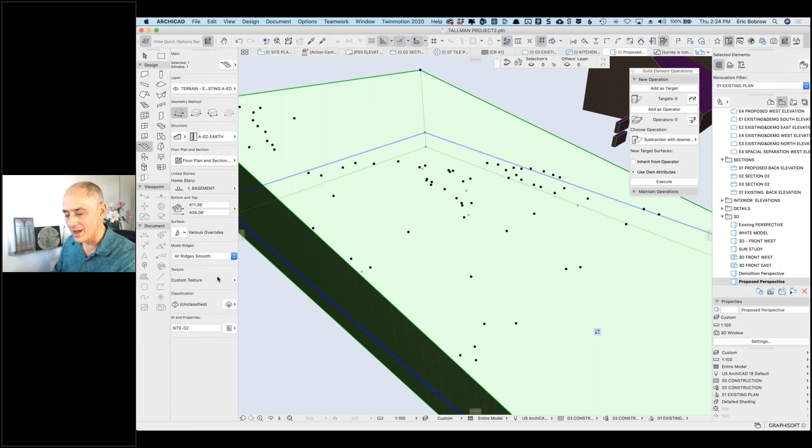But this one I could make it shorter, right? It wasn't long, but the elevation points were still showing like 18 feet, 26 feet, and I said no, there is something wrong. Then I switched it to the other one, and it was that long. So I don't know - I did something right in this one. I don't know, but this is a good starting point.

I don't know what's going on with - you've got some points here. Let me just change the override to this top grass. You have a grass here that is actually... let me just turn this. Okay, now I've just made it so we're not seeing much of anything visually because of that.

So if I change this to something, I don't know, you have different colors here. I don't know if there's something that would be... this is another long story, one day I'll have to go through. This is a private consultation probably because it's so confusing. I made a mix between.

What I want is I'll just do one that does not have a texture, so I'll just do a color beige. There we go, we can see just a slight indentation there.

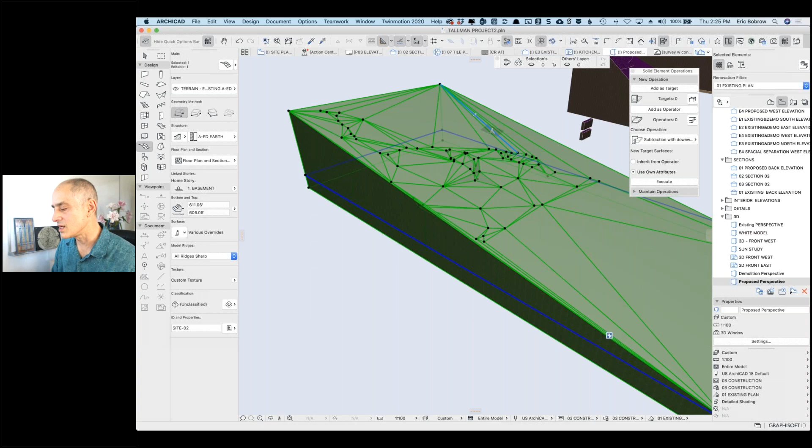Now, if I wanted to be able to see how the ridges look in reality, I can say user defined or sharp. You don't have any user defined ridges because you just did point elevations. If I say all ridges sharp, now we can see what's going on. You've got, so you've defined some points.

They may be accurate, but it's hard to tell what's going on. But you got the survey afterward. You can just create those points like I did, in the last 5 minutes. The one you did will work just fine. The only nuisance is that I had to create a solid element operator to be able to cut off the bottom, as opposed to just having a bottom that made sense.

And Eric, all this was created based on the PDF the surveyor sent me. Yeah, but that's because I couldn't import the DWG, didn't work. So I'm not sure if you have time to show how it would work if I would import. It would be much easier than having to trace all those contour lines again, right?

Okay, so one of the issues, well, I have other people that I need to get to, so we can have you come on to one of the Archicad coaching program calls. Yeah, we can do that tomorrow. Yeah, later, later, let me just make a comment.

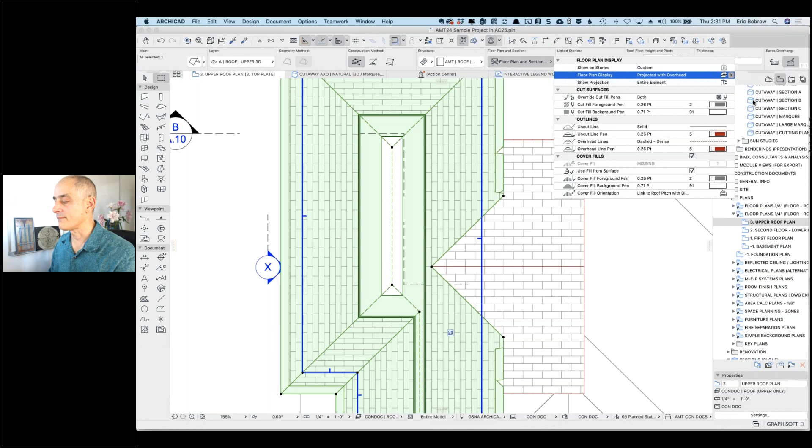Okay, so now you're seeing this sort of effect. Is that what you're seeing? Yeah, so you're seeing an actual slice of the roof thickness, however thick it is. And that is, especially if you have insulation, not useful for the most part.

Not useful at all. So is there any way to make that just a single line like we used to do when you were hand drafting? You bring the roof up to whatever. Well, you basically don't use a projected view, you use outlines. Well, but that does the whole roof.

Say, well, I don't want to show the dotted line above — that clutters up the floor plan. I do a lot of remodels where I'm inside an attic or a roof comes halfway up. I want to stop it before the wall and not show anything above the line.

So it's like... so it is the roof. Is the roof actually continuing and you just don't want to show it, or is the roof stopping at the wall? It's actually continuing, and I don't want the diagonal lines of the hip in this instance to show through, and I don't want the thickness of the roof to show either.

Okay, well, you might want to basically create two different roofs that are stacked so you can control that. I'll demonstrate that off to the side. Let me first undo back a few steps so that I'm back. Okay, so now I think this is set for just outlines only.

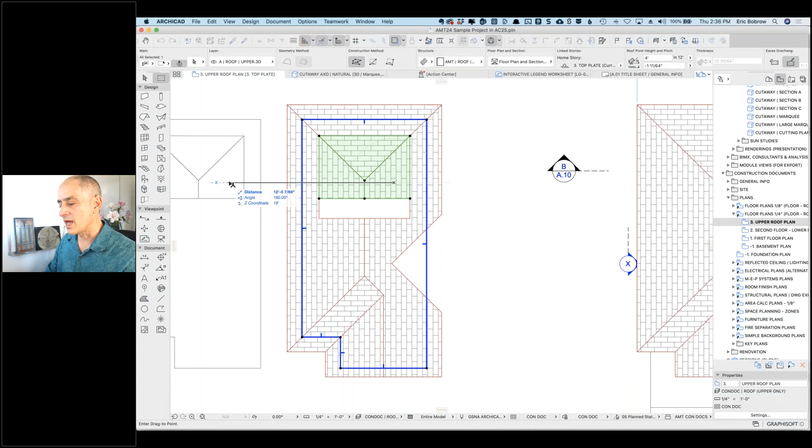So now I have two roofs. This one is... let me get rid of the outer part there. And come on now, this one, subtract out the one here. So this, all right, so now this is a roof.

You can see it has the same defining lines there. I'm just going to drag it over to the side, and you'll see that this is the upper part, this is the lower part. Now if I look at these together in 3D — just take a look, will I see a line in 3D? I think that they'll blend in nicely.

So you can see I left open a gap there — I didn't actually fill that — but here is the upper roof, and here is the lower roof.

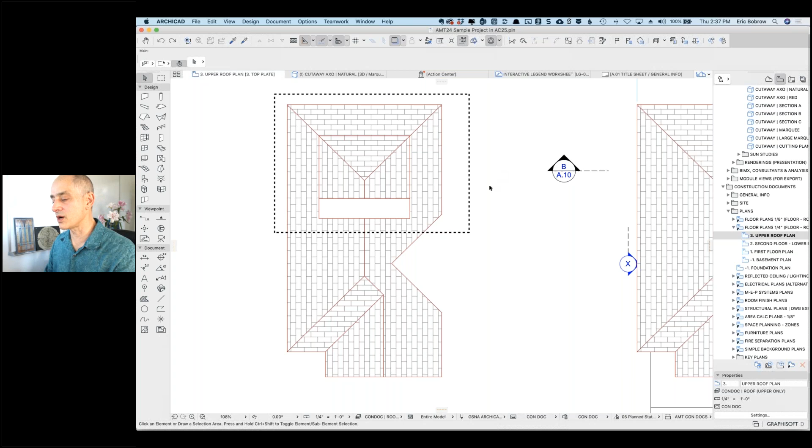So basically, if you want to show where it on a drawing, or you want to show something that only has a lower part, that would be one option where instead of literally projecting a cut through, which gives you that funny composition of the roof, you literally break it up into two roofs. That's one approach I would consider.

And it looks fine in 3D. It'll look fine in elevations, and it looked fine on the plan. In terms of... it does have complications because I use the Cadimage roof tool.

There's a glitch there. I'd have to see it in context to see if there's a better solution for you. So there's no option just within the roof tool, or a graphic override, to somehow get rid of that thickness if we're changing from outlines to projected.

Let me make both of these be the higher, 12 and 12 - the steeper slopes at 12 and 12 here. And you can see this one is projected, and of course I could do the same with this just to be consistent.

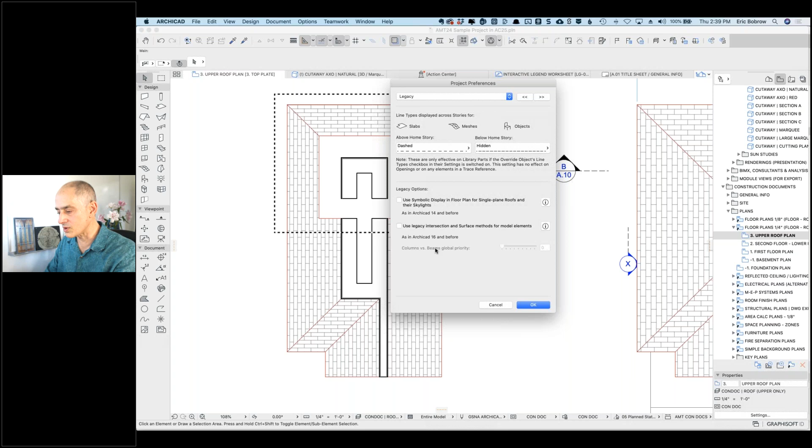Projected now shows where it's cut and everything below. Let's just see - there is cut only. But now we're seeing the worst part of it. We're not seeing any of the surface, we're only seeing the cut. So that's really the opposite of what you want. You want the stuff around the cut, not no cut.

Now there is a setting that you could potentially look at. It's under Project Preferences Legacy, where you say you want to have - they used to have one for roofs. Legacy display options and floor plans for single plane roofs. Let's try that. No, that's not it - I thought that would stop showing things. Maybe that has to do with fascia or edges that are not vertical, but it obviously doesn't change.

One of the options I considered for keeping my Cadimage tools is just modeling like the plywood, the sheathing only, so that thickness would just be like a fat line. And then the roof structure below, that's what I was doing when breaking up a different thickness for the actual roof. What we would do in real life is cut down the eaves to some smaller thing, but we do different roofs for the structure around the eaves.

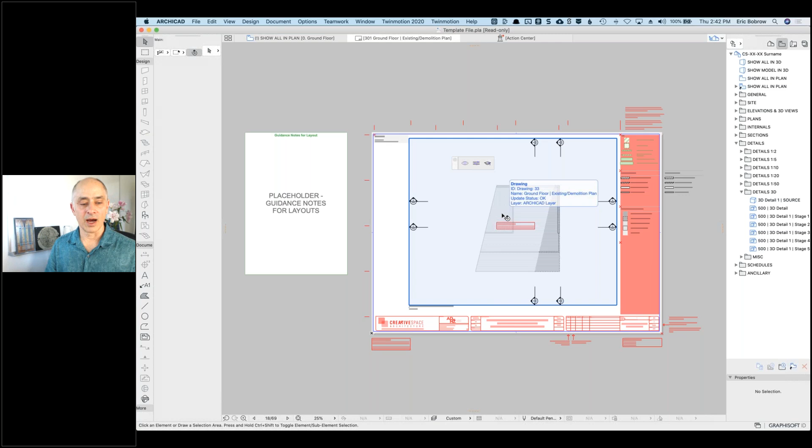One of the other workarounds I did was to do an override for the roof lines that made them very light, so they don't bother so much on the plan. And then if I need to, the workaround similar to what you're doing here is just doing a 2D boundary line on miscellaneous - I'm popping out just the edge with a 2D line, rather than everything else.

So okay, I think you were on the right track with looking at alternatives. I thought I was mistaking your question for one that had a more elementary answer, but you've got some sophisticated conditions you're trying to work with in Cadimage and different things. Okay, appreciate it, let's move on.

Josh, are you online? Hey Eric. Okay, so you did type in a question related to Monica's mesh, which was back half an hour ago.

How would you dimension a cut area of the mesh, or solid element operations used to flatten the building platform? So, how would I dimension elevation dimensions or the volume - it's more in plan view. You can use the level dimension tool to mark spot heights of the existing mesh, but at some point you'll probably do a solid element operation to cut a flat building platform, and then you need to show some level dimensions of what that new height would be.

But the level dimension tool reads the unoperated mesh—it doesn't seem to recognize the solid element operator that's been used. Okay, that's an interesting question.

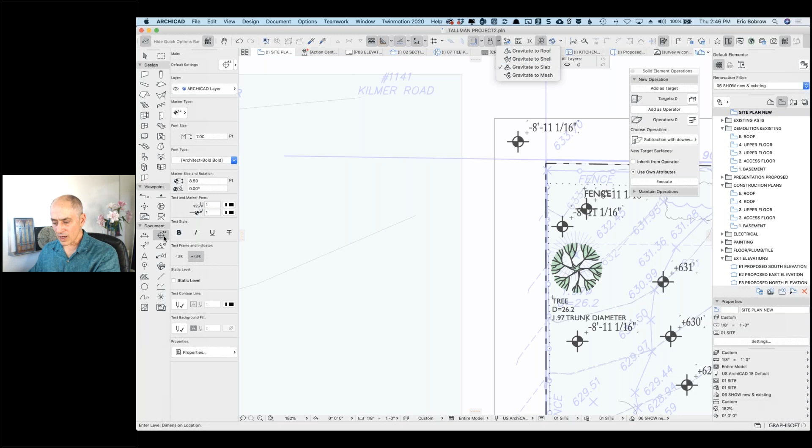So that would be an option if you're flattening it out totally for a platform—you have a slab there and you dimension to the slab. And then you could hide that slab, or maybe the slab will now represent the dirt, or the grade there.

And you can gravitate to roofs as well, so if you wanted to have a sloped surface.

Now, if you had two different slabs and two different terrain meshes, and one was operating on the other, I'm not quite sure how you would work with it. It might be that by turning different layers on or off, even though the model doesn't change, the documentation could gravitate to what you've got.

Now the other thing to think about: let's say this is a terrain mesh, and I'm going to drag a copy of this just a little bit. Did I drag a copy? Yeah, now I have two of them.

The reason I'm doing that is if I hover when doing dimensions, you can say gravitate to mesh here. You can see how it's highlighting one mesh, and I can hit the tab key and highlight the other—so now we're saying which one we want it to pay attention to when giving us an annotation measurement.

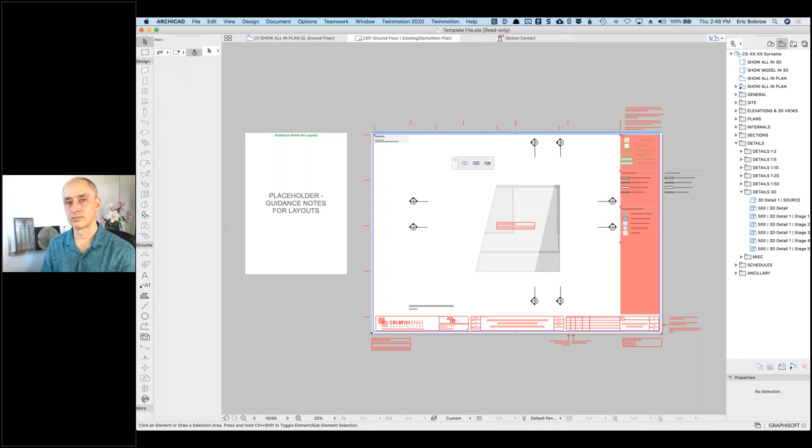So this is a template for your firm. Tell me a little bit about your firm, what you focus on, and what you particularly focus on in terms of making sure the template does things well.

Yeah, mainly residential, so single, two-story—probably more renovations as opposed to new. So a lot of the tools, or the keys and plans, are set up to handle renovations.

We probably have a strong use of graphic overrides versus pen sets—pretty much have one pen set, and rather than telling each element to use a different pen and then changing that pen set and associated pen in a different view, we use graphic overrides to pick up the classifications and properties of an element and change its appearance based on that. Okay, all right, so you're simplifying the pen sets and getting graphic changes based on graphic overrides.

So that's it. What do you do when you're outputting drawings, on the sheet?

Pretty much just using the same default pen set on the drawing, rather than using different pen sets. So when you want crisp black lines, you're just using this first column? Yes. So that's a bit of a limitation, but if you make it work, that's fine.

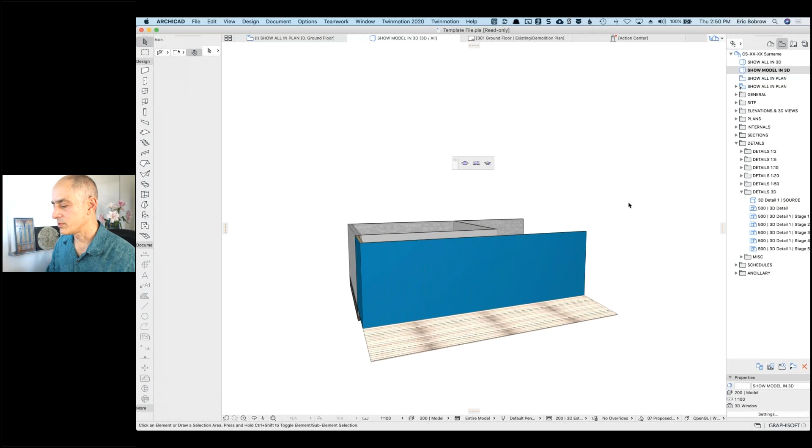Okay, so that's interesting that you opted for that. Now you mentioned graphic overrides, so let's go to plan. You've just drawn a few elements in there to give a bit of orientation.

All right, so here we're looking at show all in plan versus show model in 3D. We've got just a few elements drawn here. What's the difference between show model in 3D and show all?

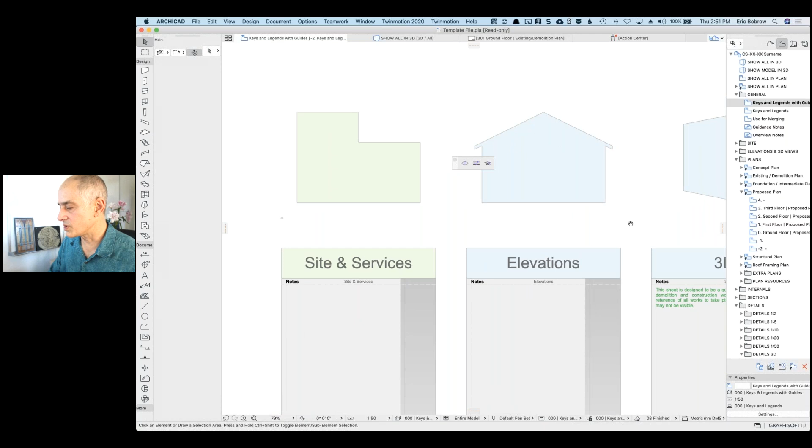Basically you have a story set up where all the, I guess, dumb keys and legends, the non-interactive keys and legends, all the walls and 3D elements displayed on each layout are drawn on a story called keys and legends. Let's take a look at this story.

So we're looking at, would it be under plans? Actually, if you went to general, one of the top folders, you can see there's one there, keys and legends with guides. We do have quite a few interactive keys, but there's always stuff that needs to be drawn manually.

Wow, all right, there's a lot to absorb here. I'm just going to look at a superficial thing. So we have site and services notes, and a little symbol to make it easy to look at.

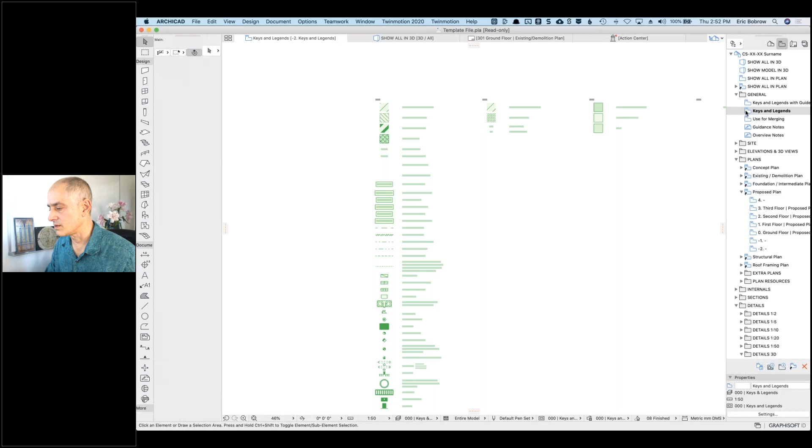Now, are these notes that are going to be placed on a sheet? No, see in the view map, the one you have selected now says with guides. The one below just says keys and legends. That view is basically a duplicate of this view but has all those guides turned off.

That drawing is what's placed on a layout. So here we have a drawing placed on a layout with a legend indicating what various symbols or graphic elements mean. I understand those being legends — what are the keys related to?

Sorry, might just be terminology, but legends is probably the best word for it. It's just that you used the word key here. Would you say this is a key and these are individual legends? I'm not quite sure what you mean — maybe it's just the wording. I guess that will be the key for that layout, and then you have a legend for the layout.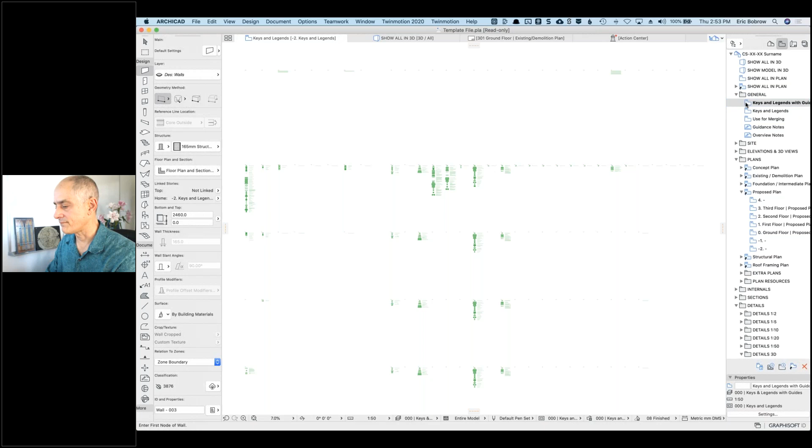All right, so if I zoom out and fit in window here, you've got a whole lot of stuff. Do you have some 3D stuff in here, I assume? Yeah, I think there's a few walls and sanitary type objects. Let me just fit in window.

Let me go to the wall tool — select all walls. I did select all walls, but I'm not seeing any walls come up. Maybe if you went back to the keys and legends with guides and tried select all walls again. No, still not coming up — you must have the layers set differently.

Sorry, maybe walls is a bad example. Maybe an object — let's say Command A. All right, so these are all objects here. If you went down to the bottom of that list, those are all kind of annotations — things like toilets, gas bottles.

So, gas bottles — how do you access these? Do you eyedrop them or copy and paste? These are basically just more static — they're hot linked, which is why they're showing green at the moment.

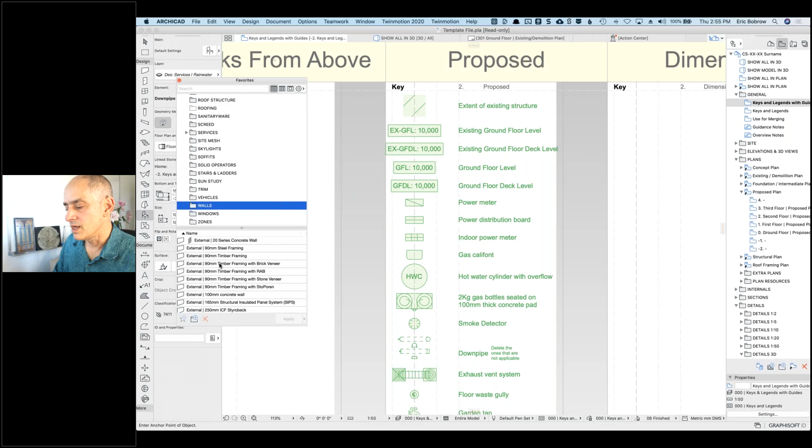As the template and resources evolve, the hot link updates across multiple projects. When a person's ready to work on the project and manipulate the keys and legends to suit it, they break the hotlink, at which point the graphic override no longer shows and they don't look green anymore. As far as actually drawing stuff on the model, though, it's more the favorites that are used.

Okay, so if we go to window, palettes, favorites — all right, let's just go into list form. So you have an extensive set of favorites for annotation, and let's see our walls.

Okay, so you have a lot of different favorites set up, and that's how you're accessing those.

I'm seeing a lot of thought has gone into setting up favorites, the keys and legends. I haven't quite gotten my head around exactly how you're using it. I know that in some cases you're placing things onto a sheet to show the legend, explaining things.

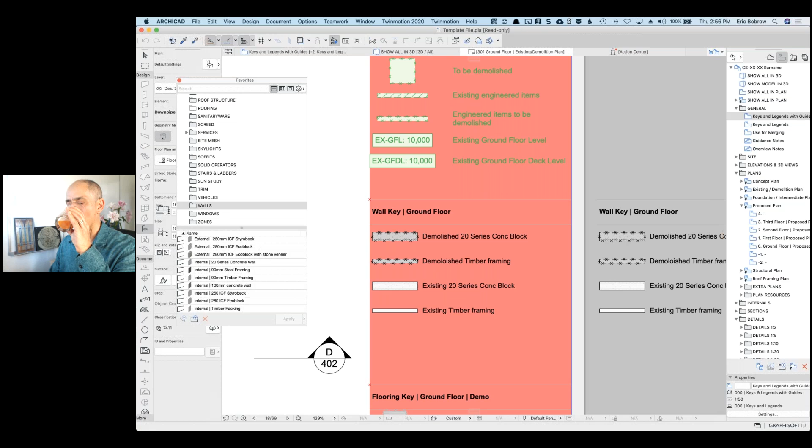I wonder if you were to go, I can see in the tabs at the top there's a layout already open, which is 301 ground floor existing demolition plan. If you were to open that layout, you can kind of see on the right-hand side there that the top one is sort of those, I don't use the word dumb elements, but they're static.

They don't update as the model changes - stuff like level dimensions and a couple of fills to indicate existing structures. Below those are interactive keys. So as elements are drawn into the virtual model, depending on their classification, renovation status and properties, these keys will update to reflect what's actually in the model.

Okay, so if I go here and say open source view - so this source view is actually a schedule. All right, and so this is reflecting stuff that's in the model that's being scheduled, that's being listed.

Okay, so some things are dumb, as you said - they're just showing images or showing what was drawn, even from the hot linked, and then some are listed and being shown that way. Yeah, there's...

Some elements, say for example, on a foundation plan, you might decide to indicate that sanitary items are shown, but it looks weird to see in a key all of the sanitary items. You kind of just want one instance to say, hey, this is how sanitary ware or plumbing will be indicated on a foundation plan. That's kind of where I guess the dumb key would be used.

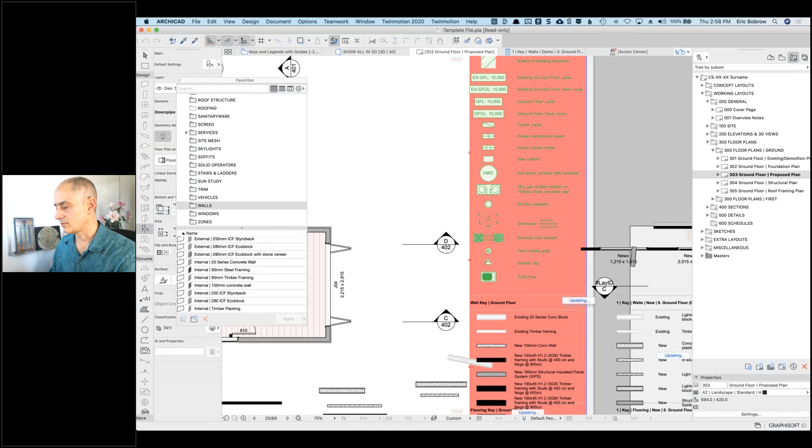Now, I'm just trying to think, in terms of your layout book, imagine this is your sort of fundamental structure that you have that would get adjusted for each project? Yeah, you can see where the folder you're in at the moment, there's, I guess, 5 of the most common types of plans or layouts that we use: foundation plan, structural plan.

There is a folder further down the list which is extra layouts, because there's about 20 odd that we sometimes use: fire rating plans, I think electrical plans. We don't use all the time, but sometimes we have them.

By the way, I just double clicked on this and tried to fit in window, and it took a moment to regenerate. And now it has come up here. Okay.

You can see a bit of work in progress on the right-hand side there with those wall keys. Have been playing around with expressions and properties to sort of alter the information depending on the renovation status. I think the one that's actually on the layout is the most developed one.

We do quite a bit of residential stuff that involves timber framing, and with timber framing, there's studs, nogs, different treatment levels involved with the timber. So I've tried to develop that interactive key to show that information based on the elements in the model. It just happens to be that at the moment, those walls in the model don't have their studs and nogs set.

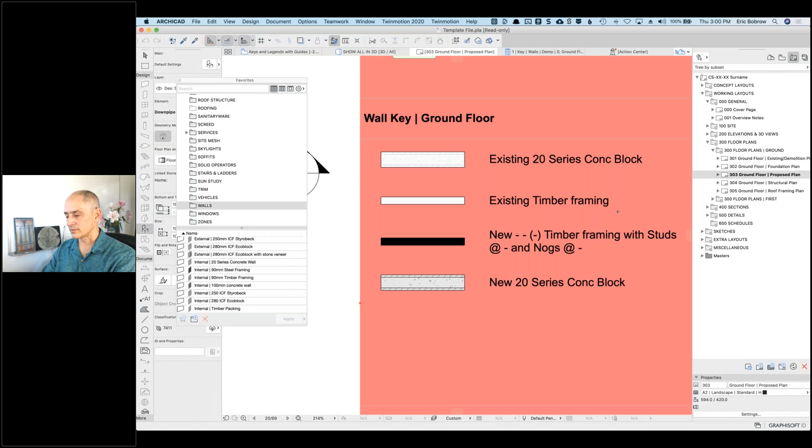Okay, so I think we might call them blocking. Yeah, and then that's separate from the plate at the bottom and the top. Yeah, that's it. Same here.

All right, now, I'm sure there's more stuff that I could just wander around and look at. Is there something specific that you are either challenged by, or you simply want to get feedback on? Like, do you think this is the right way to do it?

Yeah, I guess that was more of the approach, just getting a fresh set of eyes. I know that pen sets are more the common way, but I think graphic override is a little bit underused from what I've seen. Most people, pen sets seem to be the way, but we found there was more flexibility by setting

everything to have a base appearance, black outline, white or grey fills, and then things like decking and carpet actually have their colours set. But if you wanted to draw a beam and we were designing it, it would just show up a certain way. But if it was getting an engineer to design it, it would automatically change its appearance based on

that property. Since it seems that the graphic overrides you're doing are one of the areas you put a lot of effort into, and it's quite different than what most firms are doing, I want to at least get a sense of what you're accomplishing with it, and see why you're doing it.

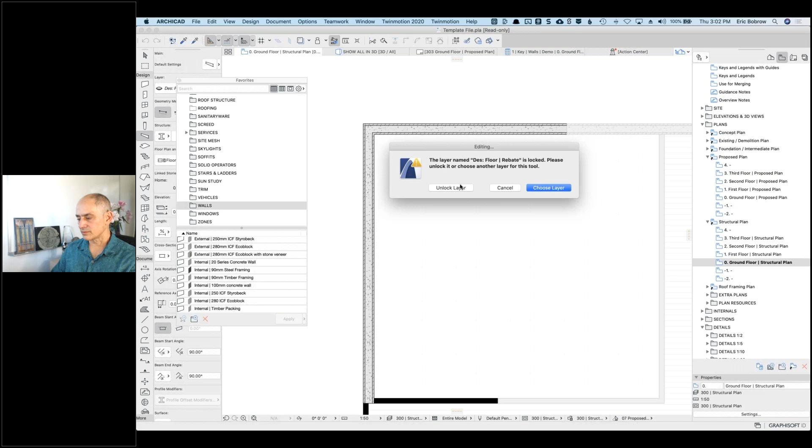So if I go to, in the view map, you're in the proposed plan folder at the moment. Perhaps if you went to the structural plan, just the one directly below, and went to the ground floor plan. Now, I haven't actually drawn any beams in here yet, but if you click on the beam tool,

in the favorites there should be a folder there called beams. Take your pick, perhaps not that first one, but any of those hySPANs or steel beams, any one of those.

All right, so here's a hySPAN. Yeah, if you just drew that anywhere on the plan. All right, so that layer is locked when I activated... oh, this. I think that, could you just try that favorite again? I think it's not referencing the right one.

Let me, so I went to the beam and used the option to bring it up right away. Here's hySPAN. Yeah, if you double click on that - layer designated DES structural beam. So I double click on that and there we go. Okay, so maybe I didn't double click it, I'm not sure. Anyway, all right, so I'm just drawing this.

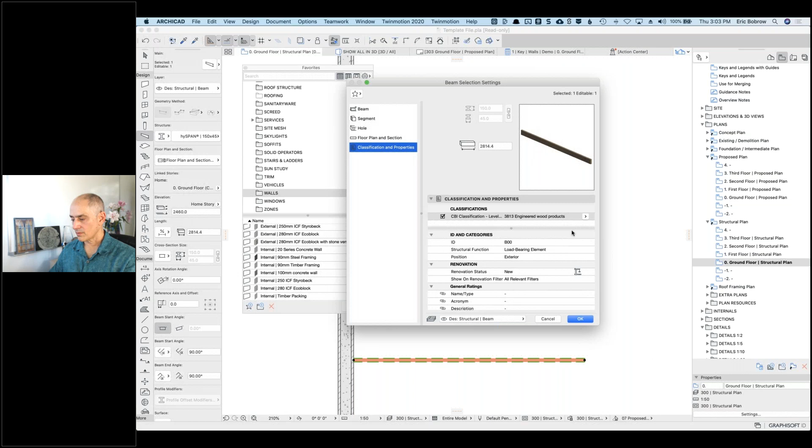Okay, so we've got this sort of reddish appearance with dashed lines on the outside. I'm not quite sure where it came from, but that seems to be a way here of how we display structural elements that are specifically designed by, say, an engineer.

So with that beam at the moment, say if you were to make a copy of it, and in the properties under B1 structure... so you're saying, yeah, properties there. So that's basically the New Zealand use.

Well, there's a few - what's it called - information schemas. CBI seems to be the most common one. I think in the States you guys use... is it COBie? Yeah, this is not an area that I know very well, so just tell me what you think would be useful to demonstrate.

So down that list, there's B1 structure, and it's got structural design, SED, which is basically specific engineering design. If you were to change that to say 'not applicable', and go okay, it would change its appearance because we no longer need to highlight that it's a specifically designed element.

And there's all sorts of examples through the plans like that, on a fire rating plan. If a wall is rated, say 30, 30, 30 minute sort of ratings, it would change color based on the properties entered in. Okay, let's look at your graphic overrides and see that one particular change on the structural plan.

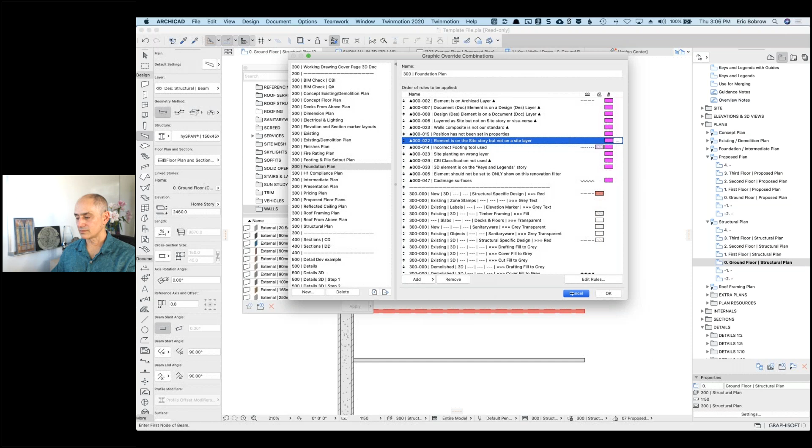All right, let's take a look at this. So what is the rule here? Element is on the site story but not on a site layer. So we're basically saying if it's a 3D type that's independent, not a door or a window, and the layer name does not contain 'site', so it's on a layer other than site something, and it's not on the right story, then we want to indicate it as something of note. Yeah, that's it.

All right, so I like this. This is certainly an audit quality checking thing. The structural plan has this particular feature on there, but I imagine that might also be available for other plans.

So if we look at the foundation plan, the other thing is when you hover over an element, it'll come up in that little element info popup and actually tell you which... say if you grab any one of those elements and even change the layer to the Archicad layer.

Oh, you can actually see, when you hover over that beam, it actually said which graphic overrides were affecting that element. That bottom one, 300 - it said graphic overrides was the 300-000 structural specific design. And this one, no graphic overrides. Okay, interesting.

So if I select this wall, graphic overrides, nothing there. Okay. But if you hover over an existing wall, you'll see that there are graphic overrides applied.

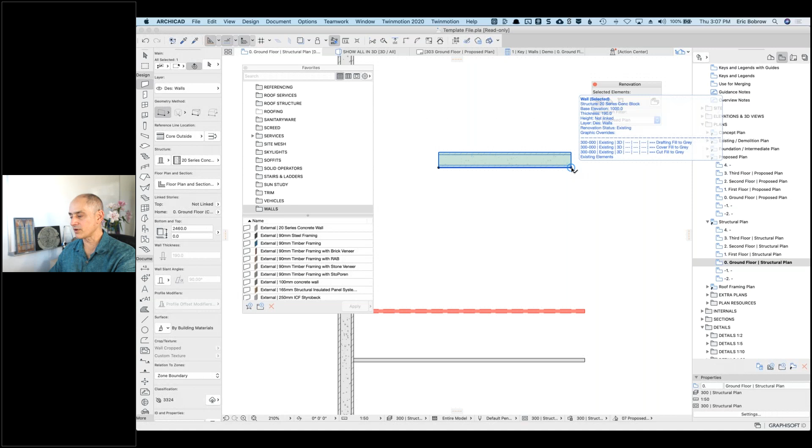So let me drop this wall and get our palettes - we have renovation here. If I draw another wall similar to this, select it and make it existing, it changes here. And if I'm hovering over it with pre-select, here are the overrides.

So these are the rules being applied - drafting fill to gray, cover fill to gray, cut fill to gray. So when I deselect this, it becomes gray as opposed to there. Very clever.

Since we won't be able to go through all of the smart stuff you've got in there, let me ask - how long have you been using the template in this form? I know it's evolving all the time, but how is it working in terms of getting higher quality, fewer issues, productivity, etc.?

Yeah, probably roughly 2 to 3 years in its current state. It's always evolving and developing, but it seems to work quite well when you're trying to maintain an office standard rather than relying on individuals choosing how they want to display stuff. The idea is to have it automated so that when they draw any kind of beam, as long as they give it the right classification, it'll present how we want it to.

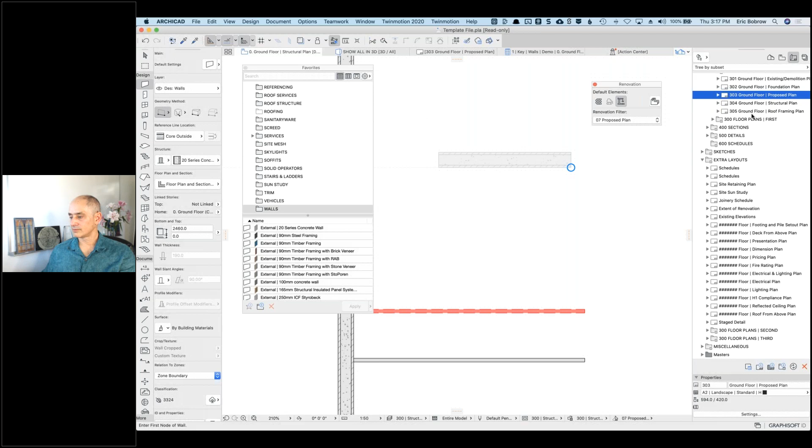So that's a painful, annoying thing, but it sounds like you're only doing issues every so often, and a manager or someone similar handles it, so it's not like a junior person has to create an issue and set it out - that's a good point. If it takes 5 minutes to fix and you only do that once a week or once in a while, it's annoying but not the end of the world, and doesn't seem like a big time waster.

Anything else that seems frustrating, or that you wanted to mention? Actually, going back a bit to those keys and legends and eyedroppering in the view map - in the plans folder, down a little bit, there's a folder called plan resources.

Hotlinked module to object library. That was something I'd seen in one of your videos - the idea that you've got a worksheet with a hotlink module to an object library, so the guys can use this as a trace reference. It's working great for the objects, but there's a handful of walls, beams, and curtain walls that don't show up. It might just be one of those things that worksheets can't handle.

Okay, so this is a worksheet. Worksheets are 2D only, with the minor exception that objects can be placed there because they have a 2D representation but still carry their 3D information. You can't have a wall, window, door, slab, or roof that you could eyedrop or select and copy-paste, because they're not eligible to be in a 2D worksheet. So the workaround is to have the worksheet contain a trace and reference of a view on the floor plan. In my master template, the worksheet for main legends is blank, with a trace reference showing a view from the plan. So you're seeing walls and other 3D elements, and you can eyedrop them - you can't select and copy them, but you can eyedrop.

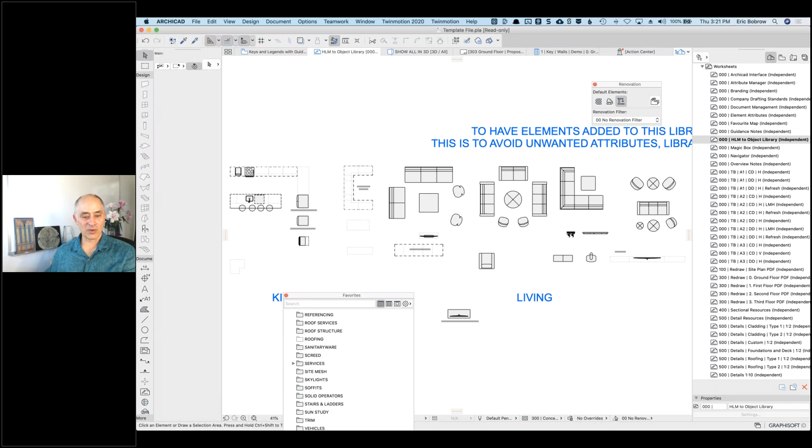So where in New Zealand are you based? An area called the Bay of Plenty, in the North Island - about a couple of hours from Auckland, one of our biggest centres, on the east coast of the North Island. And I don't think we're pushing 20 degrees Celsius today. So you're slowly getting warmer, starting to warm up. Yeah, so good.